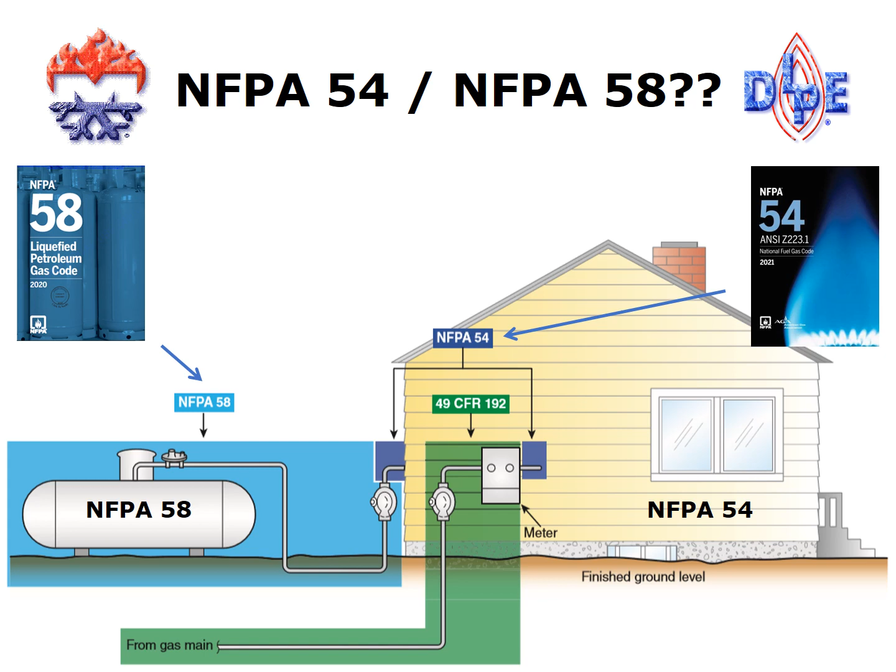Today we're going to talk about cathodic protection and how that system protects underground propane containers. We're going to discuss installation practices and also testing procedures.

The 2020 edition of NFPA 58 requires that a corrosion protection system be installed on all new installations of underground steel containers. This corrosion protection system should consist of a container with a coating that complies with section 5.2.1.11. Now, the containers that come from the manufacturer already have this coating in place.

In addition to that coating, all installations must have a cathodic protection system that consists of either a sacrificial anode system, which is the system we're going to be explaining and discussing today, or an impressed current anode, which traditionally is used for larger, more industrial type of accounts.

Also, in addition to the system being installed, a means of testing that system is required. We're going to go through not only the details of how to install a cathodic protection system, but also how to test it by the standards set forth in NFPA 58.

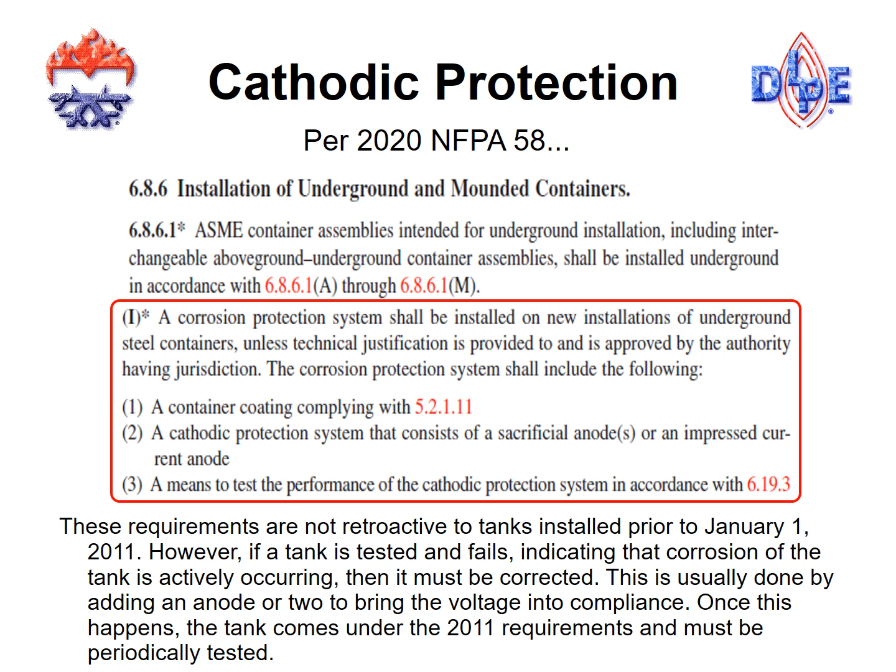Some of the terminology you may hear, and some of which we're going to talk about today, are as follows. We're going to talk about an anode, and in this case it's going to be an anode bag. An anode bag, or an anode, is an electrode where the oxidation or the corrosion will take place. In other words, the magnesium anode will sacrifice itself to protect the steel components of the tank.

We're also going to talk about a cathode. A cathode is basically a protected tank in a completed system. The way they describe it is an electrode at which the reduction is occurring. In other words, we're reducing the corrosion that's occurring at the container. This is the electrode at which protection occurs in the cathodic protection system.

In other words, a protected container or protected steel piping in an underground propane installation is what's considered to be a cathode. We're also going to talk a little bit about corrosion, which obviously, when we're talking about steel, comes in the form of rust, and that's exactly what we're trying to prevent.

We're going to mention electrolyte. What is an electrolyte? It's basically the common environment in which both the cathode and the anode share. So in this case, the tank or the protected tank, which is the cathode, in addition to the anode, which is the magnesium anode bag, are both sharing the environment of the soil. So in this case, the soil is the electrolyte.

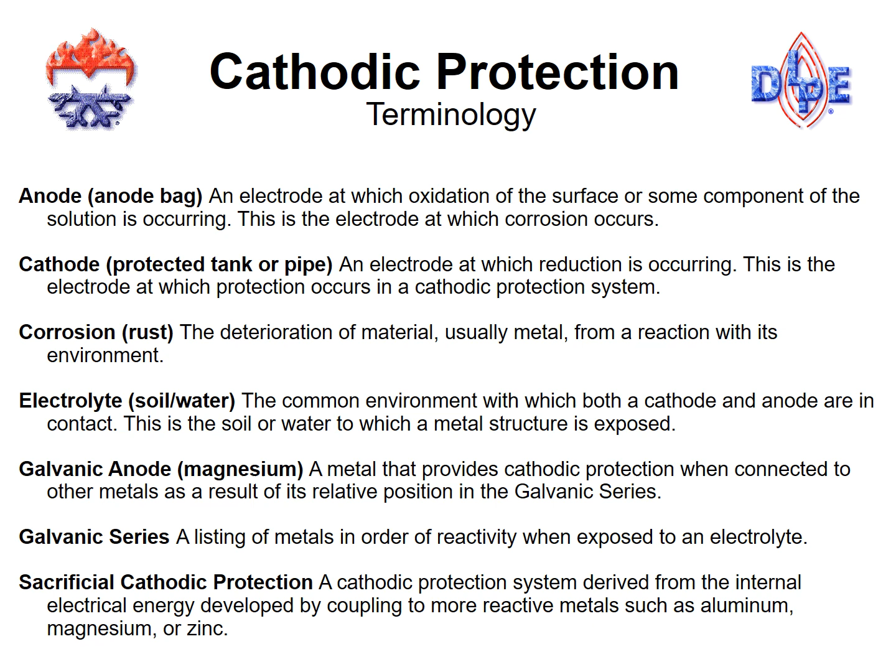Corrosion of a propane container obviously is a very aggressive form of rusting. Rust, when we're talking about underground propane tanks or underground steel piping, can be catastrophic. So that's what we're trying to prevent. We're trying to prevent that system from becoming so corroded or deteriorated to the point of failure. And that's what a cathodic protection system is all about.

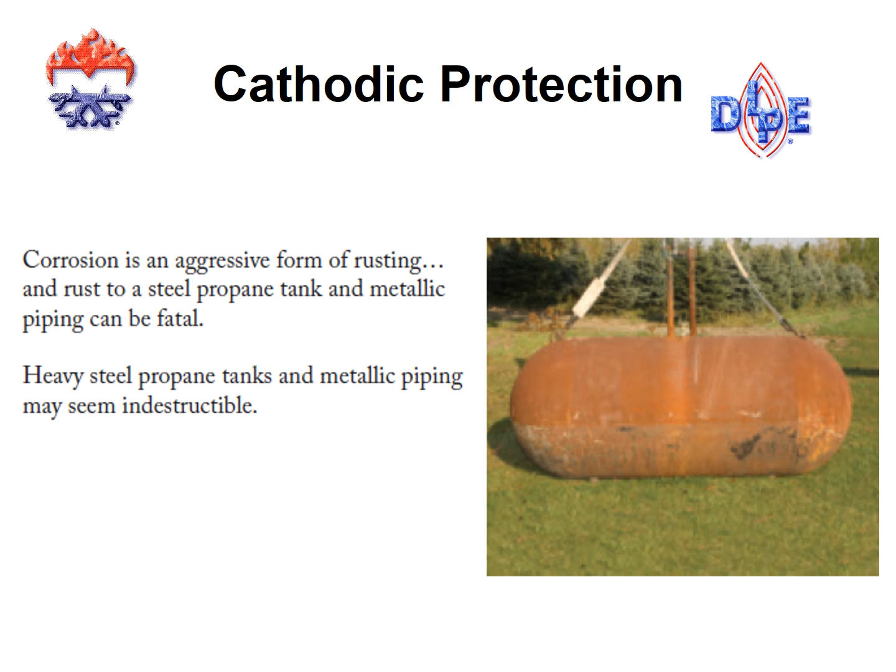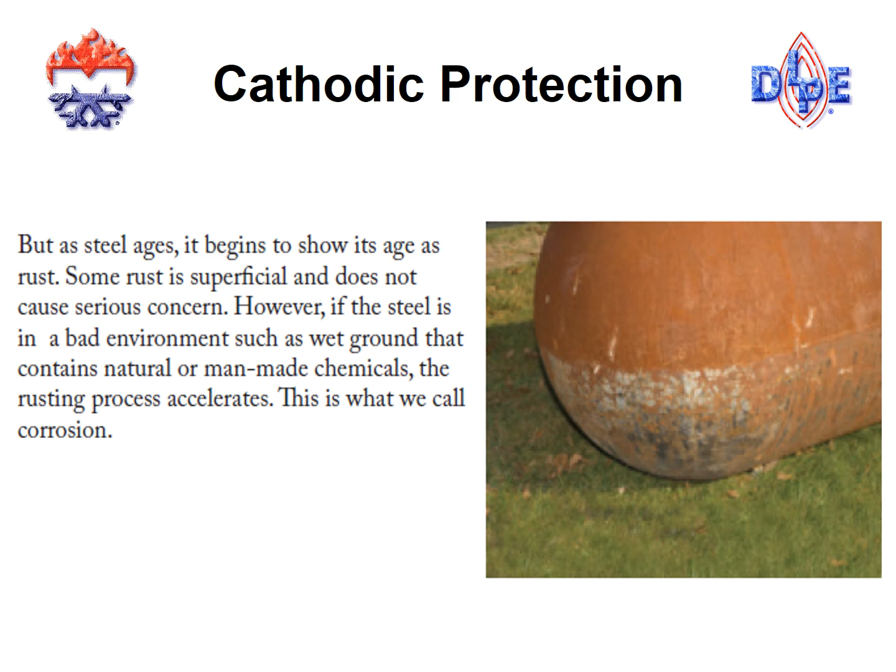Minor surface rust can be very common and may not be a big issue initially. But that mild surface rust, if not treated properly and maintained, can quickly become a more critical problem. Over time, that superficial or surface rust can become deeper, more pronounced corrosion, and it will ultimately form pits or pitting in the surface of the container. That's when the container will break down and potentially cause a more dangerous situation.

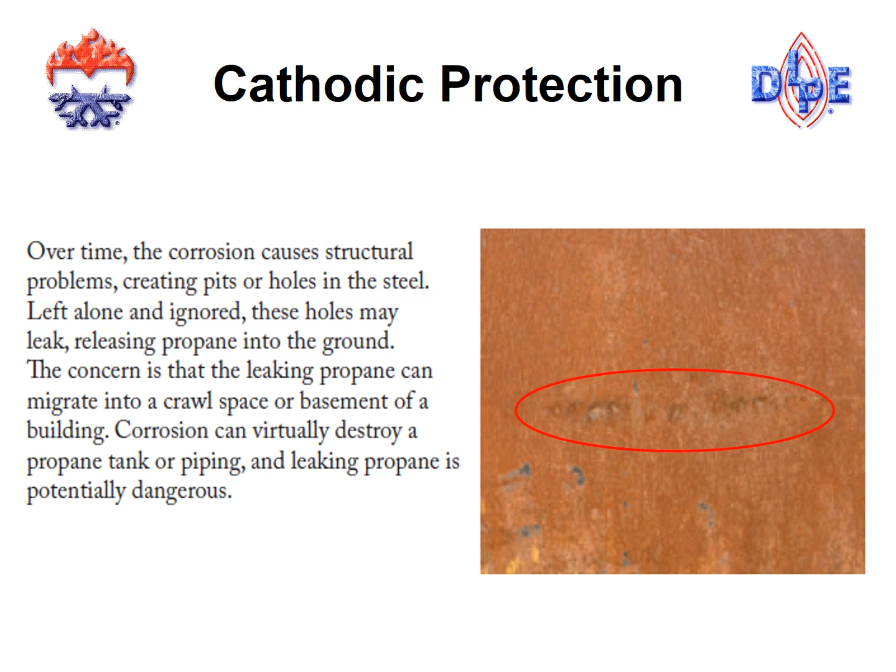When you consider cathodic protection, there are really two lines of defense. The first line of defense is the coating we talked about a few minutes ago. That coating is required to be installed on any underground container before it goes in the ground and before it's backfilled. That coating is provided by the tank manufacturer, so that's our first line of defense against corrosion of the underground tank.

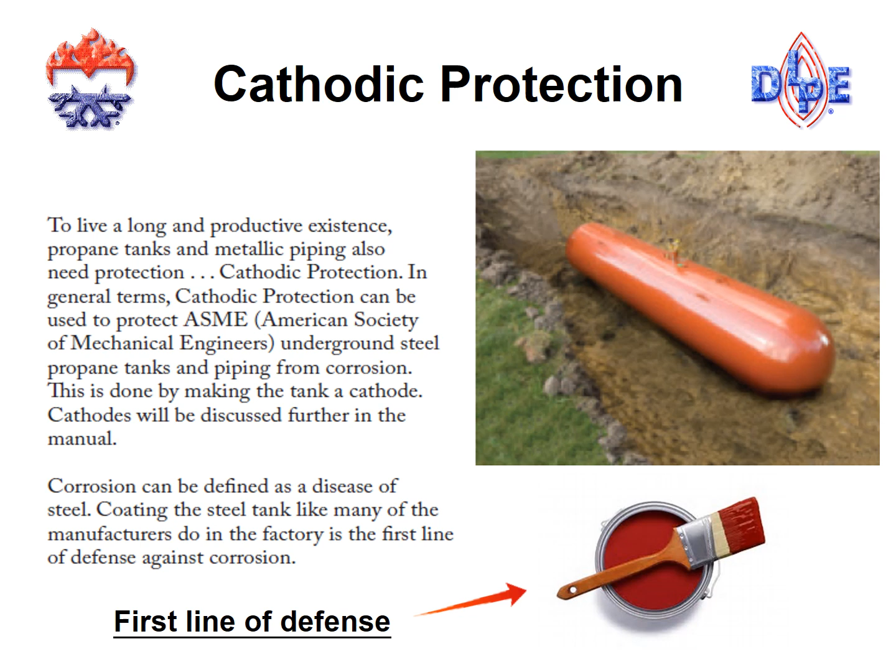The second line of defense is the magnesium anode bag. This is the anode that is connected, or should be connected, to every single underground tank installation. The anode bag acts as a sacrificial component to this entire system and will actually receive the corrosion instead of the steel container receiving it, if properly installed.

There are really two ways to cathodically protect underground propane tanks and piping. The most common by far is with magnesium anode bags. I mentioned earlier the option of using impressed current, but that's generally used in larger, more industrial types of installations. So what we're going to concentrate on in this seminar is instructing you on how to install and test magnesium anode bags.

There are many different types of anodes, but the most popular ones used in the propane industry are standard potential magnesium and high potential magnesium. Aluminum alloy and zinc can also be used, and we're going to discuss the differences now.

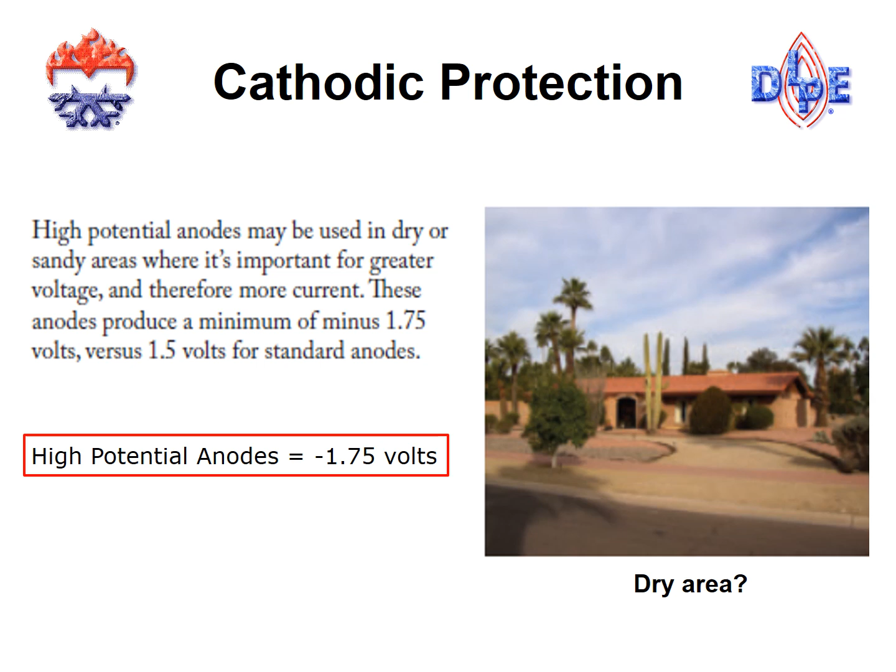You may also have locations near the coastline where an underground tank is installed next to a body of water that may contain brackish or salty water. In those cases, it's possible the local authority having jurisdiction would recommend a zinc anode bag.

However, in the propane industry, the standard minus 1.5 volt magnesium anodes are generally used. That anode will work in most any type of soil condition in the United States. There are a few exceptions, as I said earlier, where the high potential magnesium or zinc may work better, but for all practical purposes, the standard minus 1.5 volt magnesium anode is what is required in the propane industry.

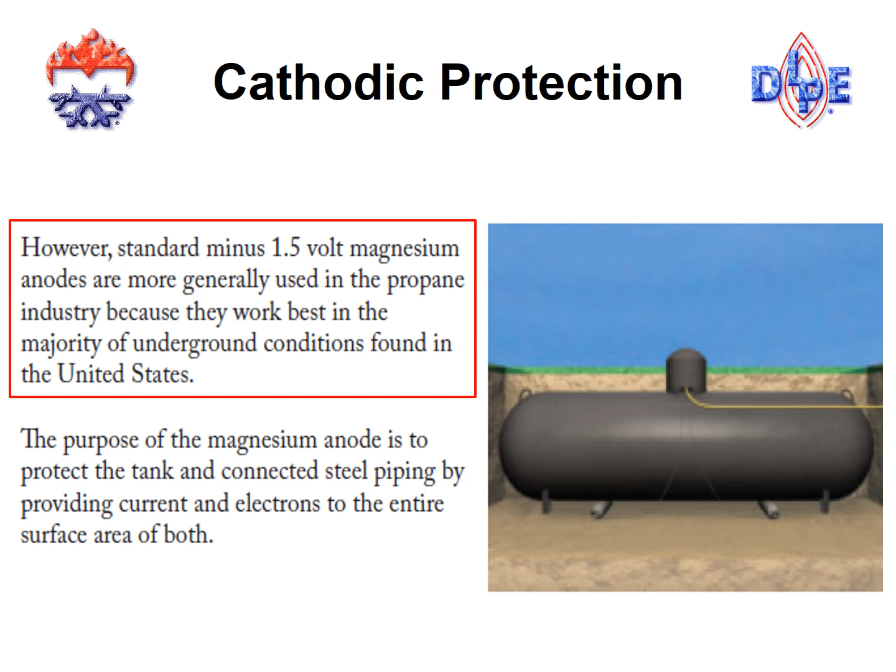The purpose for installing anode bags on underground propane containers is to protect the integrity of the tank or container. It prevents corrosion from happening to the tank. It does this by acting basically like a light bulb, lighting up the surface of the tank.

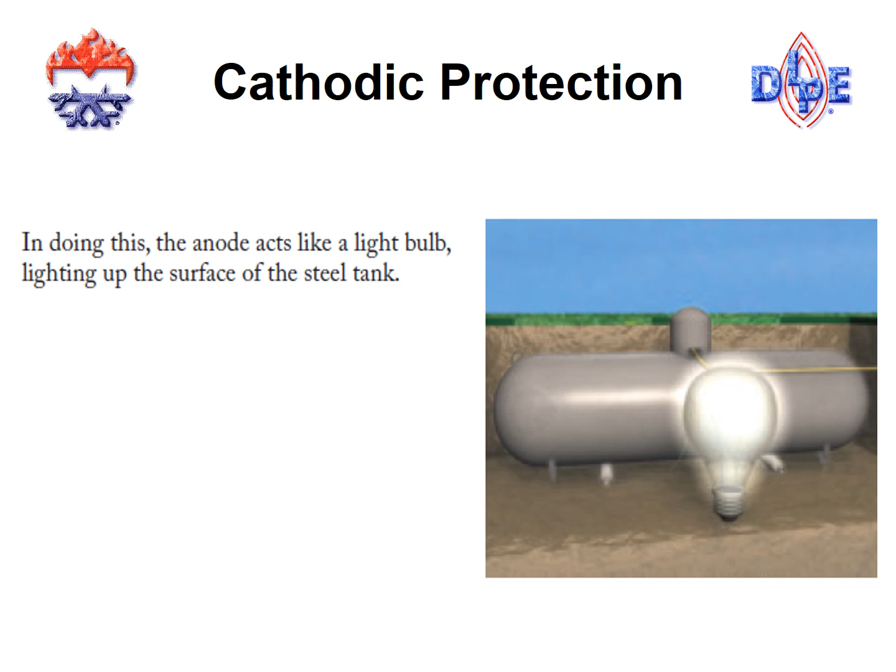This happens because all of the electrons flow from the external magnesium anode along a wire into the steel tank, which, as I referenced earlier, in a protected system is now referred to as the cathode. So it's basically an entire balanced system, which results in the magnesium anode bag, once connected to the underground container and backfilled, protecting that container.

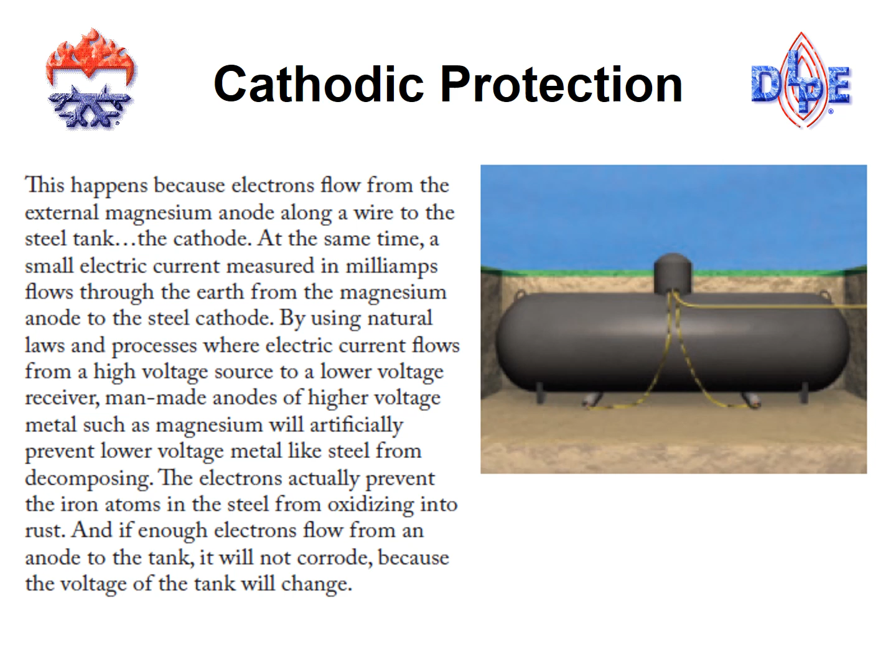I mentioned that the code requires not only the installation of cathodic protection, but also a way to test it. Testing it is really as simple as using a digital multimeter and a copper sulfate half cell, which I'll get into in a little while.

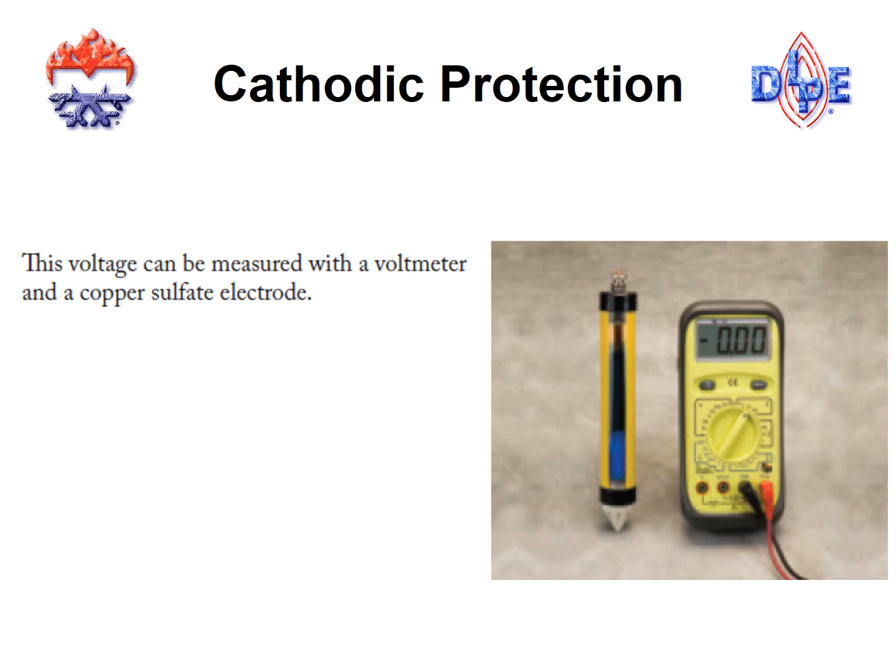You can see in the chart on the right that different metals have many different voltage readings. But we're really concerned about steel, and what they're classifying as mild steel, which is clean and shiny, has a voltage reading naturally around minus 0.5 volts.

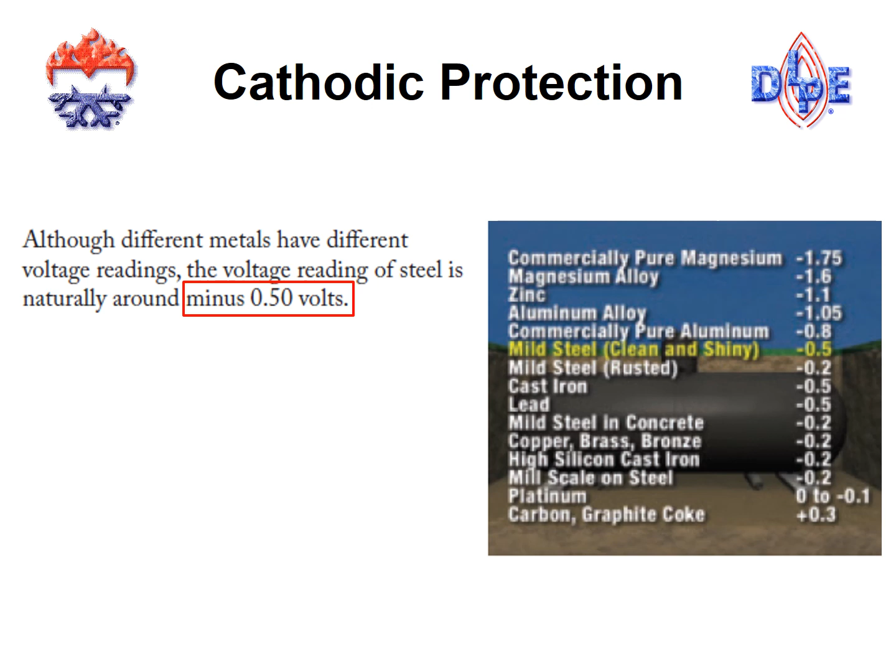A reading of minus 0.5 volts on your meter when doing a test is an indication that the tank is currently unprotected. Any reading below minus 0.85 is an indication to the person doing the test that there is work needed to be done on the cathodic protection system, and that currently the tank is not being protected properly.

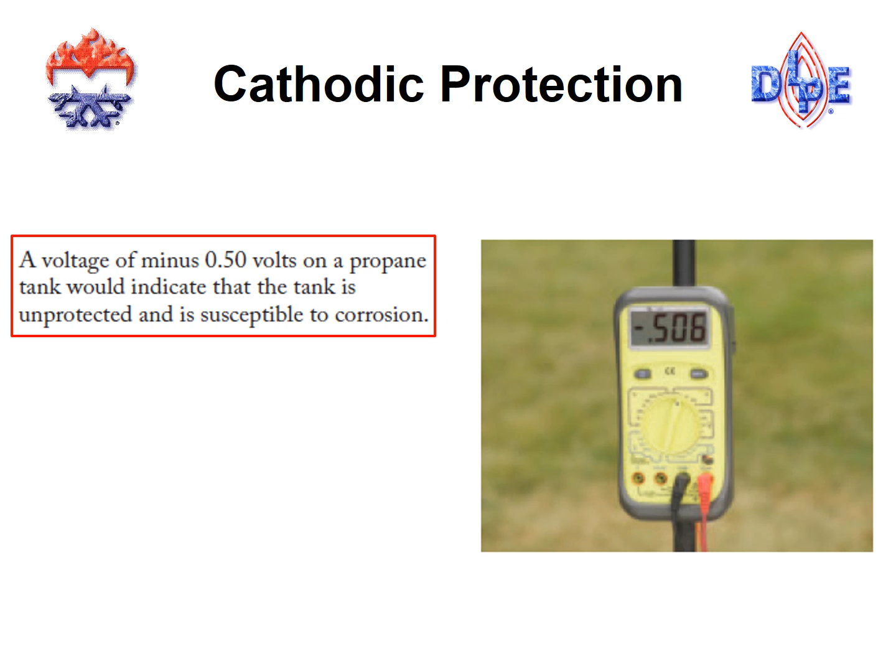To do this, we must get the electrons to shift. And we're looking for a reading that is going to fall somewhere between minus 0.85 volts and minus 2 volts. Somewhere in that range is what we're looking for.

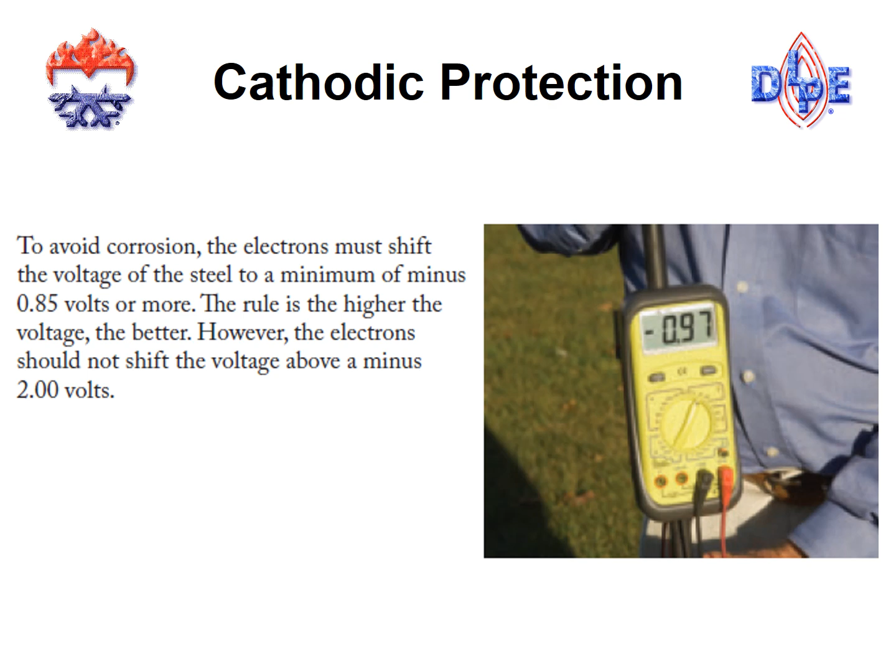Once we have that reading, that good reading on all four sides of the tank of minus 0.85 to minus 2.0 volts, we know now that we have a protected underground tank. And that is what we call a cathode, a protected piece of equipment, a protected piece of steel in the environment that's shared with the magnesium. So the tank now becomes a cathode.

It's fully protected. And the length of protection really depends on a few different things. Has the tank been prepped and installed properly? And also, what are the soil conditions like?

If the tank is installed in a dry, sandy type soil, it's possible it could last for years and years. However, if the tank is installed in a more corrosive type of environment, maybe more of a wet clay type soil, or in a more acidic type soil, whether it's at a landfill or possibly an agricultural type of installation, those things will really dictate the length of the effectiveness of the cathodic protection system that you put in.

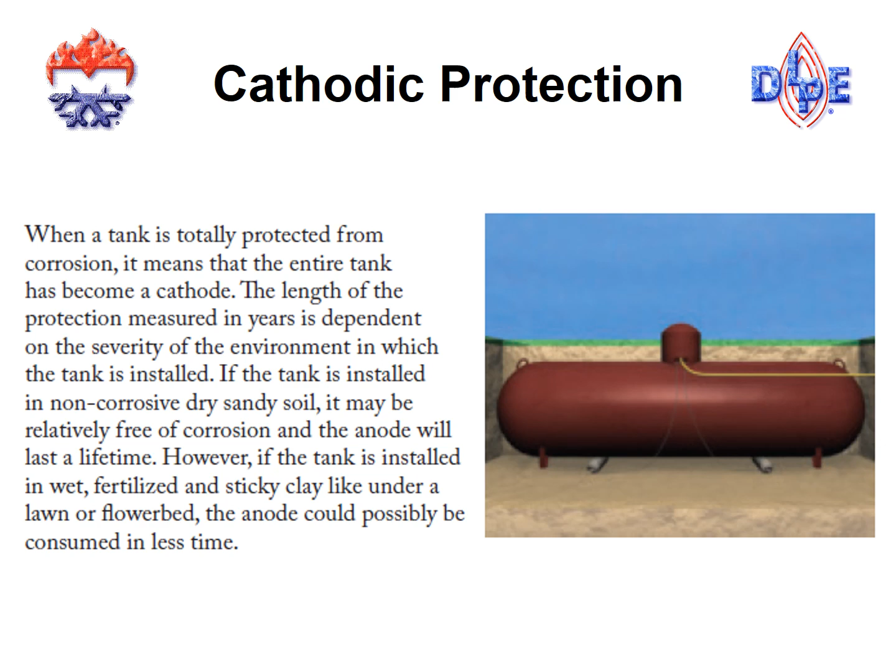We're going to discuss installation procedures of cathodic protection systems and also the testing procedures.

But first, it's a great reminder to point out that it is important before any digging is done, whether it's for the tank or the gas piping, to make a quick phone call to 811, which will notify utilities of work that will be done in the areas that they service so that they can come out and mark the ground to verify that when the tank or piping is dug, there are no utilities in the way. For example, water, cable, gas, or any other type of installation that may be there will be identified, and it will tell the installer that they have a safe location to begin the project.

It's also important to note that when we're preparing for the installation, generally a 500-gallon underground tank will receive a single 17-pound anode bag. If we're installing a 1,000-gallon underground tank, generally speaking, two 17-pound anode bags will be connected to that tank for proper installation protection.

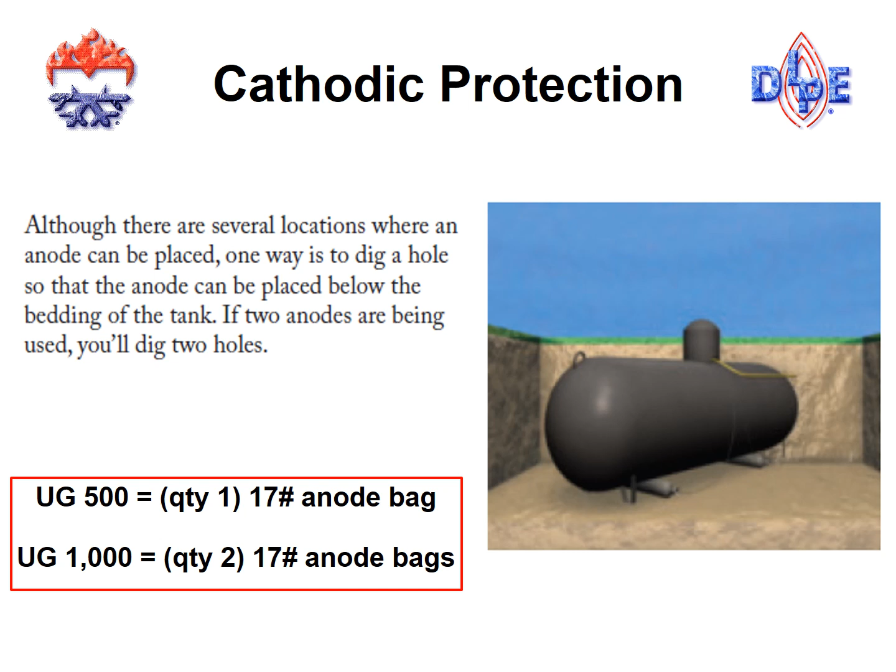For 1,000-gallon tanks receiving two anode bags, it's important to place them on opposite sides of the tank at opposite ends of the tank, and both being set out about 2 to 3 feet from the tank.

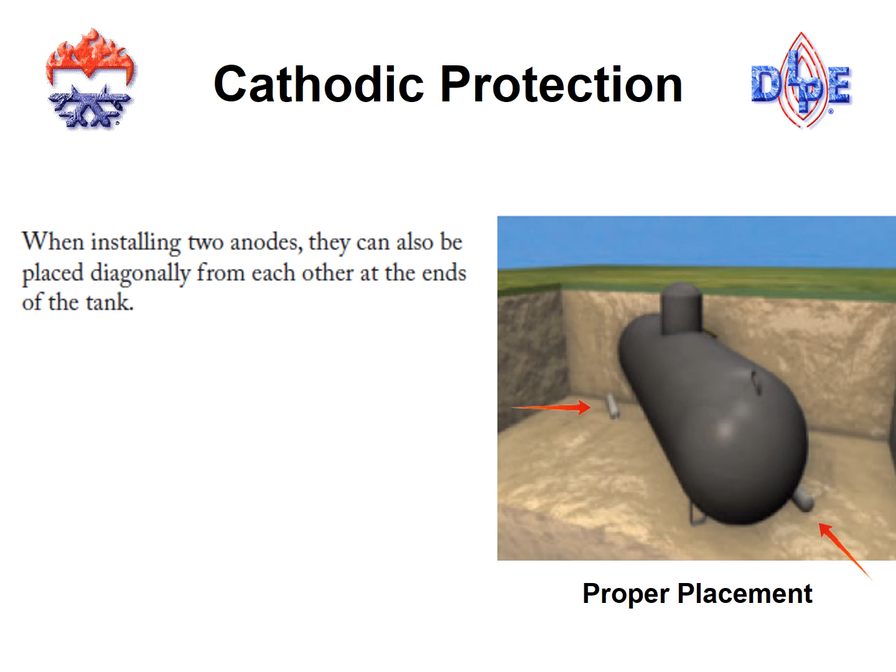One of the tech tips included in the Dealer's LP catalog is on cathodic protection. It includes a brief summary of installation instructions, including the number of anodes required for certain size tanks, in addition to where they would go with regard to placement next to the container they're connected to.

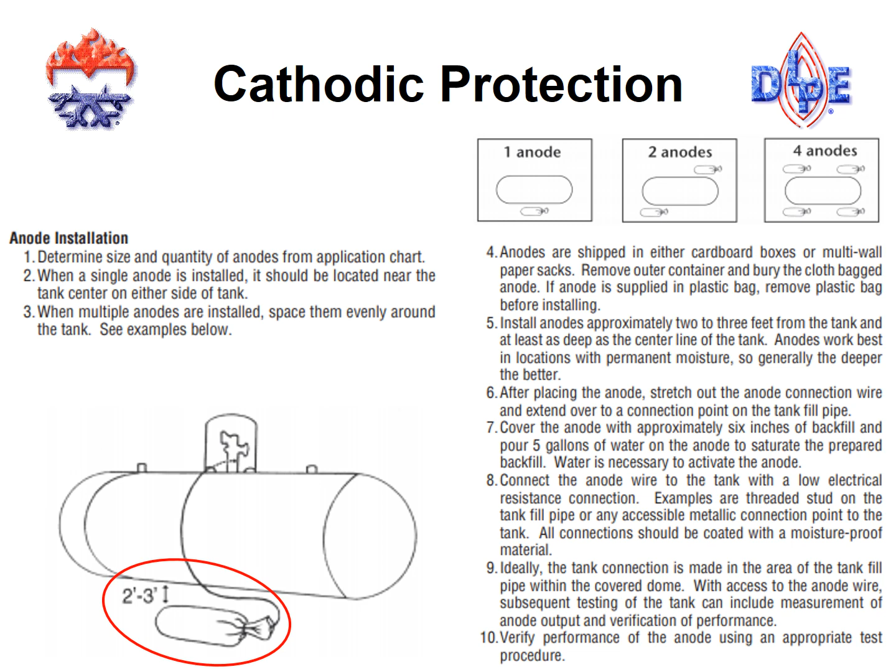Getting back to what I originally called the first line of defense, it's important that any nicks, chips, or scratches in the tank coating is touched up before that tank goes in the ground. Oftentimes during transit, whether it's from the manufacturer or to the job site, the coating on the container can become damaged. That is not something to overlook.

It is very important that any chip or scratch or any imperfection in the surface of the coating whatsoever be touched up with an approved coating, whether it's a touch-up can from the manufacturer or it's a different or alternative coating that's available more locally, perhaps at a hardware store.

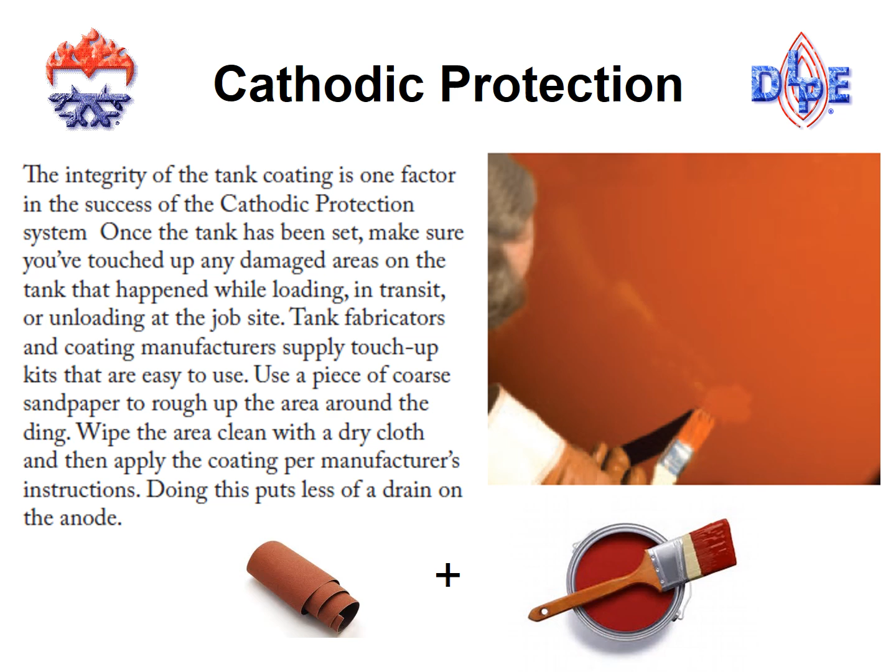This is a great example of what can happen if an underground tank is not prepared properly before it goes in the ground and gets backfilled. Again, this is where the importance of making sure those chips, nicks, and scratches get touched up.

This example took place not long ago, and basically what happened was this is an example of a tank that was installed with an imperfection in the coating. Maybe it was chipped or nicked during transport, but regardless, this hole, approximately 1/2 inch in diameter, was actually able to compromise this tank in a period of about 3 years. So in about 3 years' time, this tank went from being brand new installed in the ground to having a 1/2 inch diameter hole essentially burned through it from the corrosion.

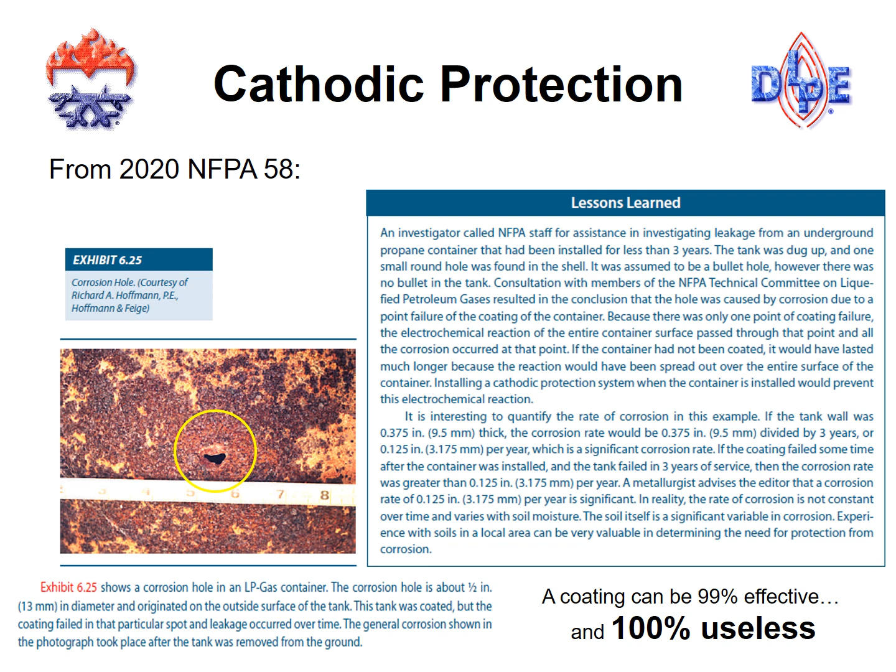Once we've made sure the tank is ready to go, there's no imperfections in the coating, and we get it installed in the hole in the ground, the next thing to do is get the anode or anodes out of their original package, take them out of the plastic bag or cardboard bag or both, and completely saturate the anodes. This activates them and prepares them to do the job we're asking them to do, which is protect the steel container. We soak them in a 5-gallon bucket by dipping them in, or saturate them with a garden hose to activate them and prepare them for installation.

The next step is to place the anode or anodes in the hole next to the container and unwind the wire that comes with the anode.

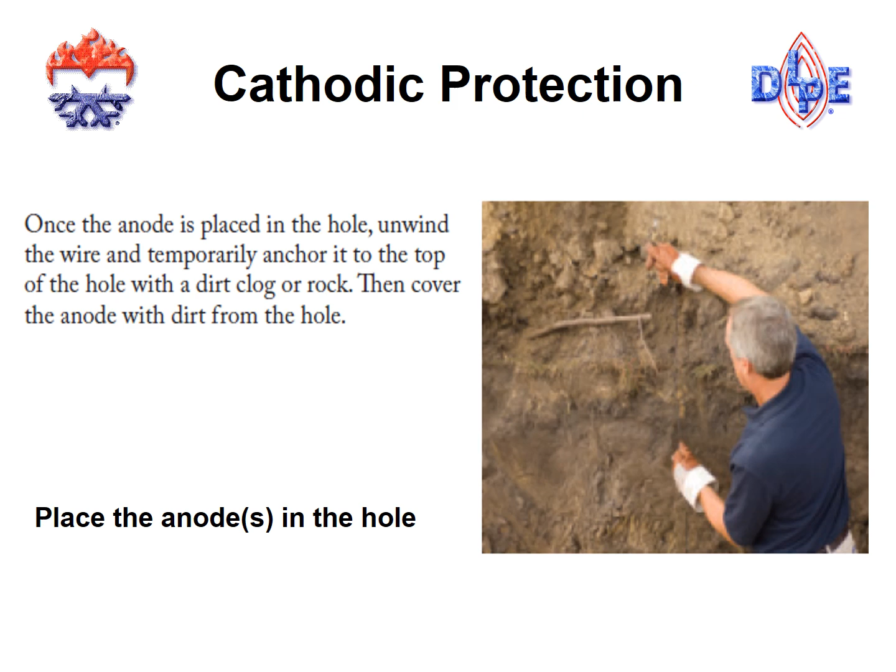The next step is to take the end of the wire connected to the anode and strip the insulation off. Then loosen the two lock nuts attached to the threaded stud, which is welded to the side of the riser on the underground tank. Once we loosen those two lock nuts, it should expose bare steel from the threaded stud. We take the copper wire, wrap it around that threaded stud, and then retighten the two lock nuts against the copper wire. Basically what we're doing is making sure we have good continuity between the end of the copper wire and the steel stud, which is again welded to the side of the riser.

Years ago, it was a requirement to actually Cadweld the copper wire onto the underground tank. Vast improvements have been made in the way to connect anodes to containers, and that is just one of them. There's no longer a welding requirement to attach a magnesium anode to an underground steel tank. So that's something to celebrate for sure.

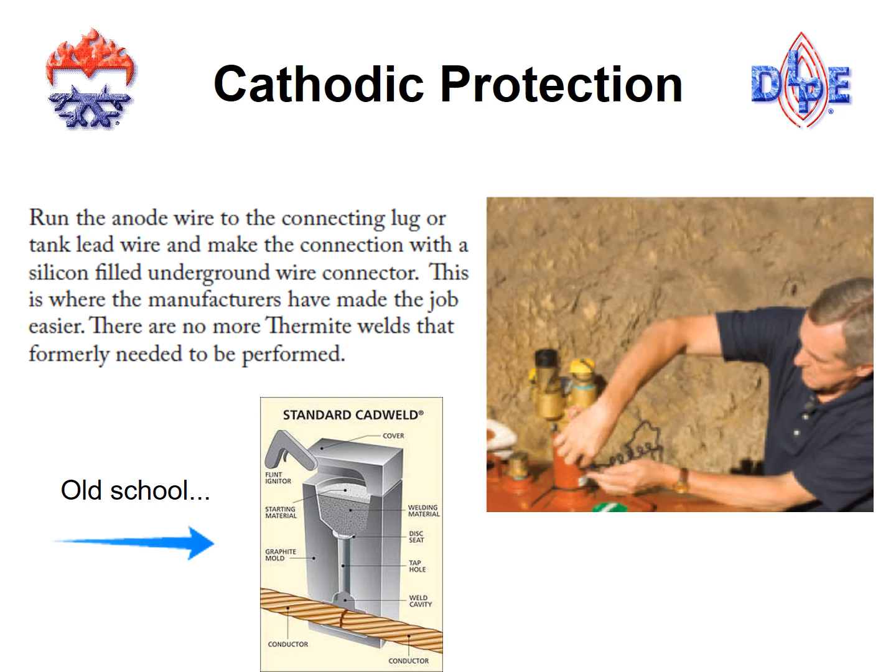I mentioned the importance of wetting and activating those anodes before they were installed, to make sure they're communicating with the soil and the tank properly and working correctly. In parts of the country with a very dry climate, it may be necessary to install extensions on top of the anode or anodes, through which water can be poured down onto them. In a dry climate, once the sand or soil is backfilled, it's very difficult for those anodes to receive water and stay wet.

In those cases, the authority having jurisdiction may require the installer to install a 2-inch PVC pipe on top of each anode in the installation. This requires periodic servicing, with the service company pouring water down those pipes and then placing a simple PVC cap over the pipe so the moisture doesn't evaporate back out. That may be one simple way to maintain water and moisture in the vicinity of the anodes after an installation is done. Again, this isn't something all communities require—it would be an option or possibly a requirement depending on the AHJ in parts of the country that are very, very dry.

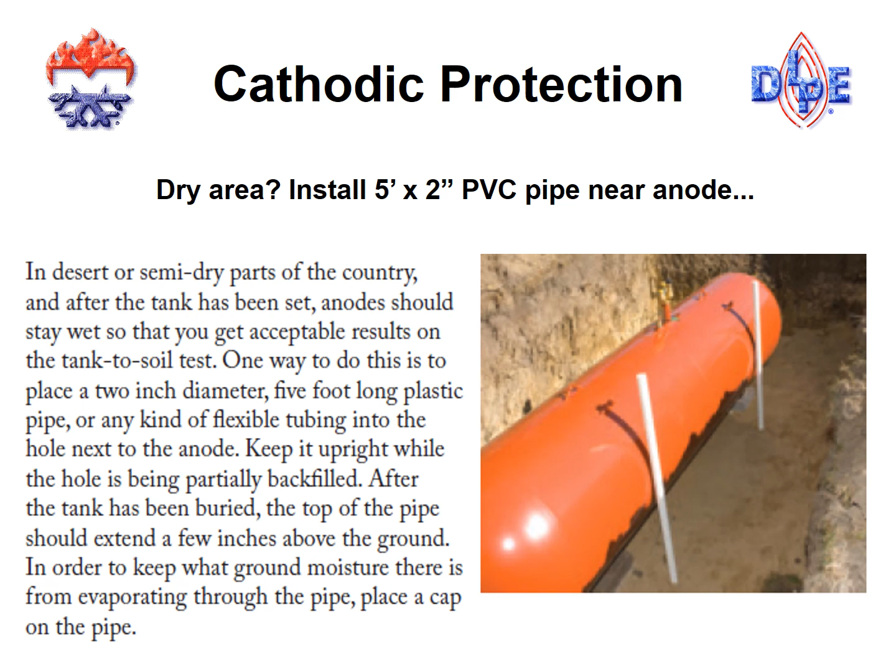On the flip side of the dry climate, we have the colder, snowy climates in the northern and northeastern parts of the country. In those areas, it's a requirement that underground tank installations be marked with a pole, flag, or something denoting where the tank is. For example, through traffic, landscapers, snowplow drivers—anyone driving past that tank, whether to park their car in their garage or do service work at the site—must be aware at all times of where that underground container is.

When anodes are sized for an installation, they're generally sized to protect the tank and the tank only. In installations where metallic tubing is used, for example if an underground tank is installed with a run of copper tubing from the first stage regulator over to the second stage regulator at the building, it's important to install either a dielectric pigtail at the service connection on the tank or a dielectric union at the outlet of the first stage regulator. What this will do is isolate the tank or container from the underground metallic tubing.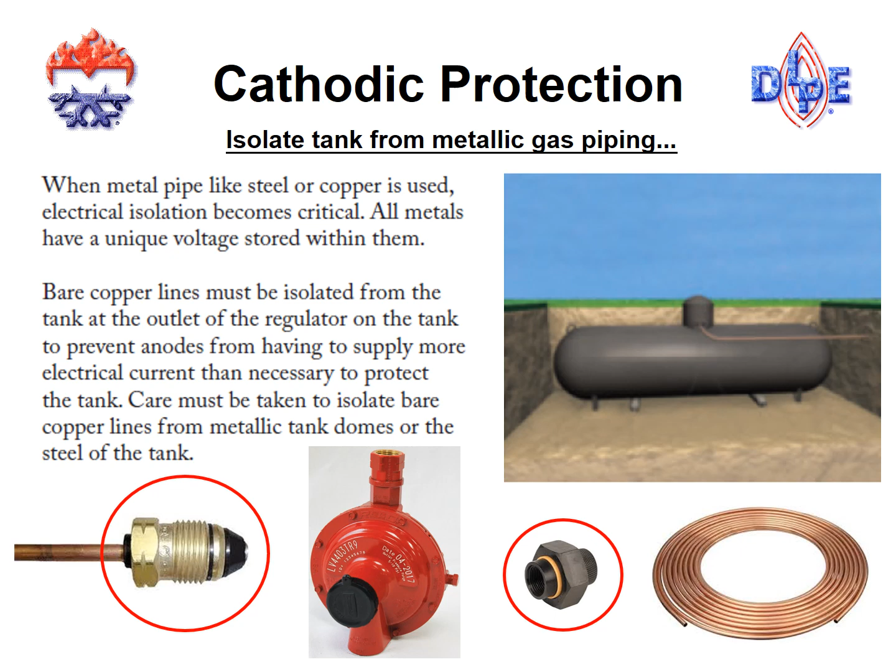It is required in NFPA 58 to cathodically protect not only the underground steel tanks, but also any underground black iron or steel piping installed underground. A lot of that is connected to the container, and there are ways that anodes can be sized to be installed at the container to protect not only the container, but the steel piping it's connected to. These are somewhat rare installations, but steel piping is used in the propane industry underground.

A lot of times it's used for agricultural applications or light commercial applications. We do have a calculator available that can determine, if a customer wants to size underground steel piping along with an underground steel propane tank, the anodes required for that job.

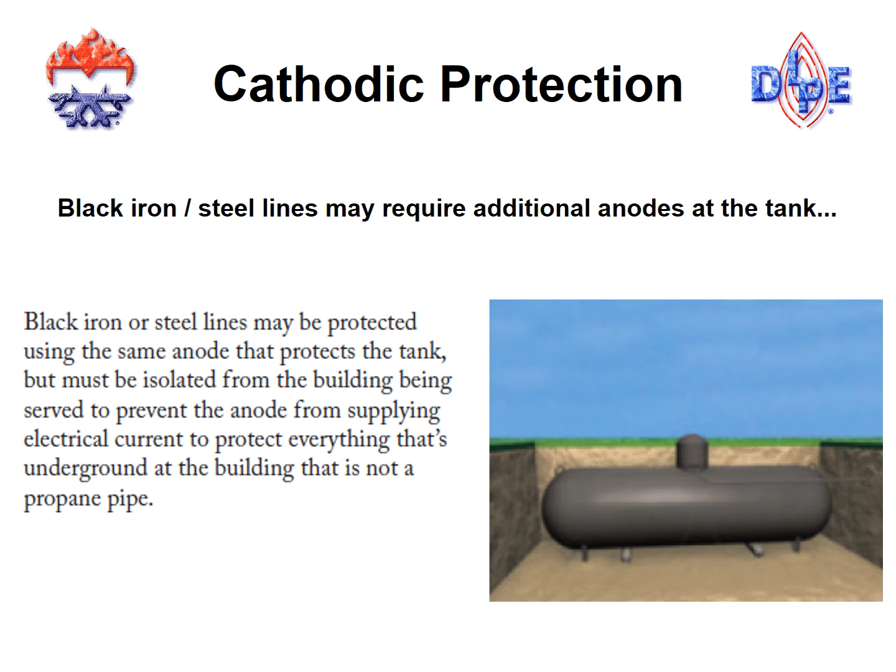NFPA 58 also states that it's required for a dielectric union to be installed above ground and prior to entering the building of a system where underground metallic tubing has been used. So as we discussed earlier about installing the dielectric isolation at the container to separate that from the underground metallic tubing, it's an actual requirement in the code to install a dielectric union, whether it's a shutoff, a regulator inlet, or a standard dielectric union, at the building, above ground, and prior to entering the building.

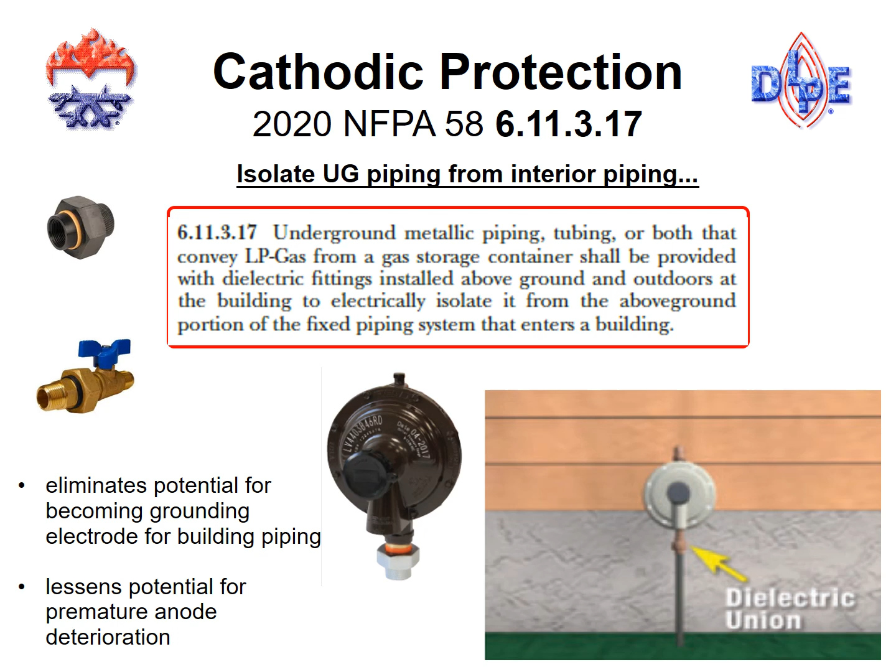We've spent some time talking about the installation procedure of cathodic protection as part of the code, but part of the code is also testing the system once it's installed. Really all we need to accommodate that is a digital multimeter and a copper sulfate half cell. Dealers LP sells a kit that has the meter, the half cell, all of the extended wiring, documentation booklets, and also a plastic case that houses the kit. It's a very handy tool to use when you're doing cathodic protection tests.

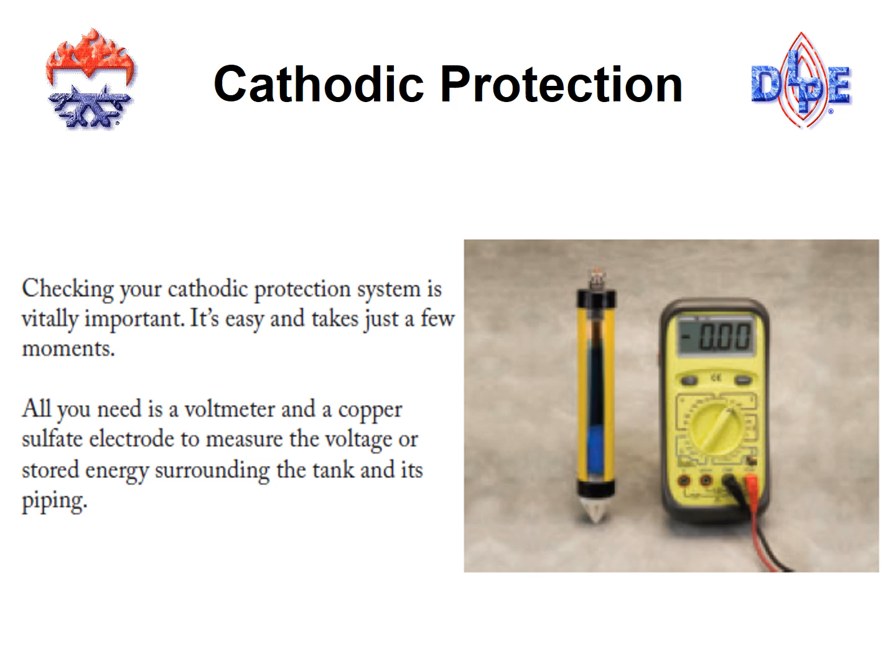When testing is performed, the first step is to moisten the ground at all 4 locations where the testing will take place. In other words, we want to wet the soil on all 4 sides of the container. We want to take the copper sulfate half cell and basically touch the earth or the electrolyte where the container sides are, directly below the surface of the soil or the sod.

Once we've moistened the soil or the sod on all 4 sides of the container, we want to take our digital multimeter and set it to the 2 volt or 20 volt DC scale.

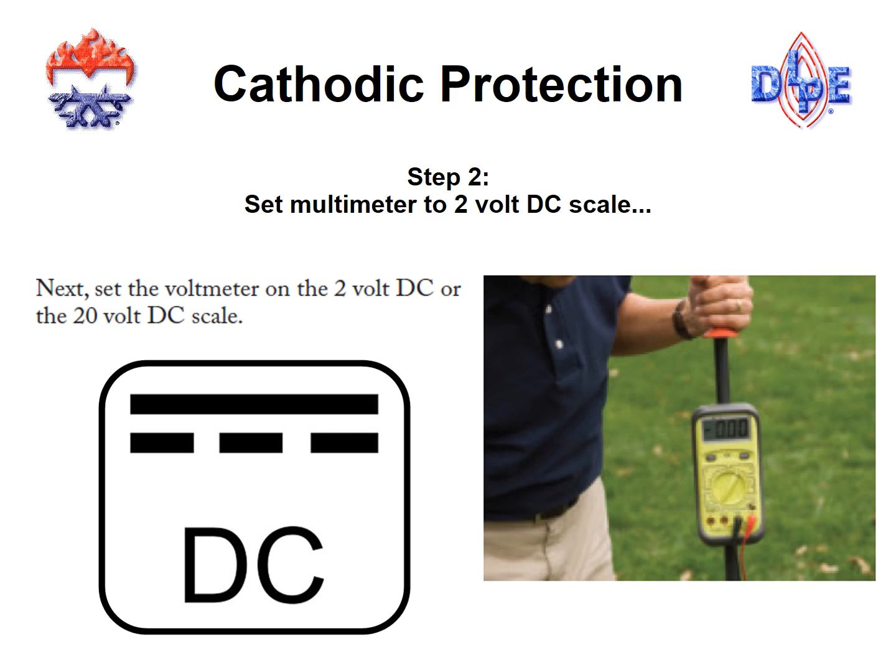The next step is to take the positive lead that's connected to the multimeter and connect it to the brass multivalve. What I would generally recommend is to remove one of the Acme caps and place the alligator clip on one of the Acme threads to make sure it holds. The negative lead would then get connected to the copper sulfate half cell or the copper electrode.

The next step would be to test the soil in the damp area, the wet area, above each side of the tank. We want to check all 4 sides. What we're looking for is a reading of between minus 0.85 and minus 2 volts DC.

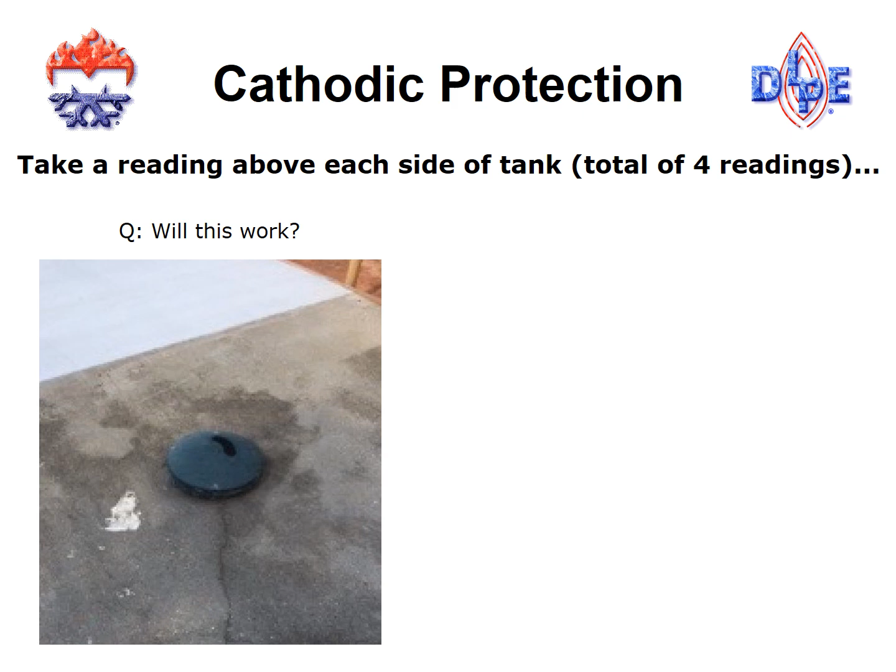For testing purposes, the answer is no, it will not work. The copper sulfate electrode must test the same electrolyte or the same environment that the tank and the anode both share.

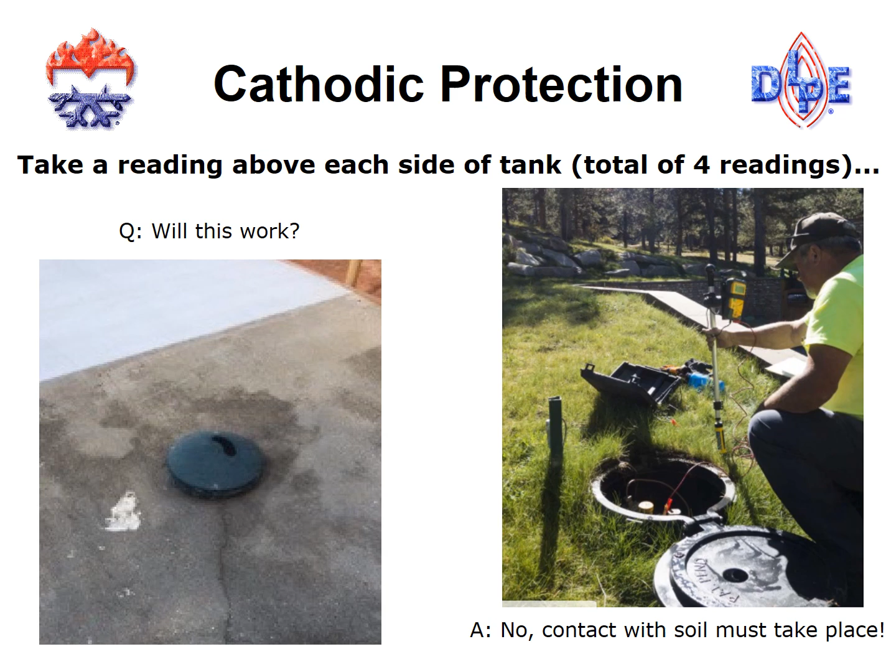If we take the unprotected tank voltage value at minus 0.50 volts, and we then connect the magnesium anode with a voltage of minus 1.5, what we're looking to do is average that number out somewhere in between. Ideally, we're looking for a number between minus 0.85 volts DC and minus 2 volts DC.

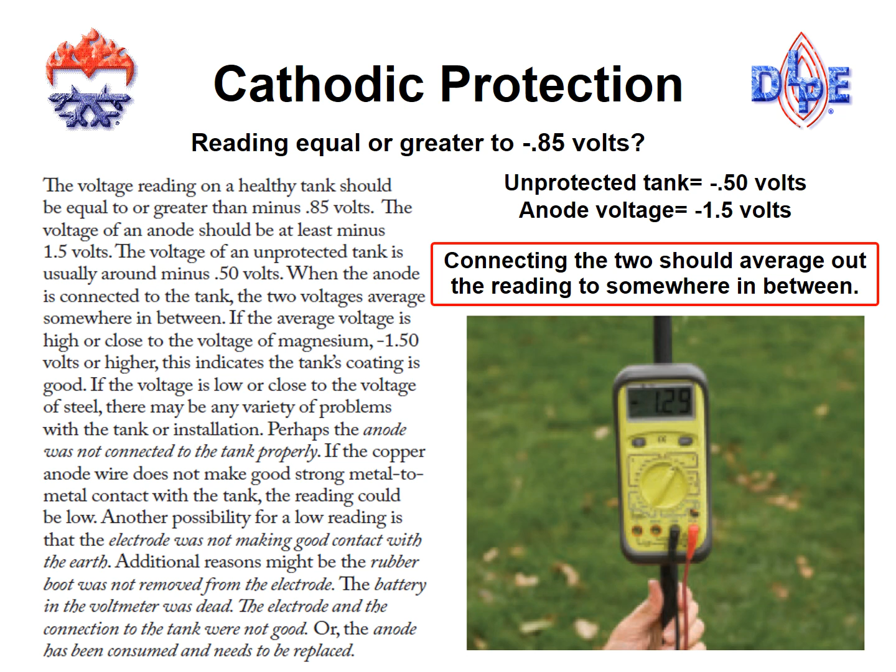If the numbers you're getting when doing the cathodic testing are not sufficient, if they're below minus 0.85 volts DC, there's a number of things you can do to troubleshoot the situation.

Is the voltmeter turned on? Is the battery good? Sometimes these meters will sit on the shelf for 6 months or so in between tests, and batteries do go bad. Have you taken the rubber protective boot off the copper sulfate electrode? The end of the copper sulfate electrode is required to be placed directly into the soil, so it has to communicate with the soil. Are the leads connected properly to both the electrode and the multivalve? Are you connected securely to both?

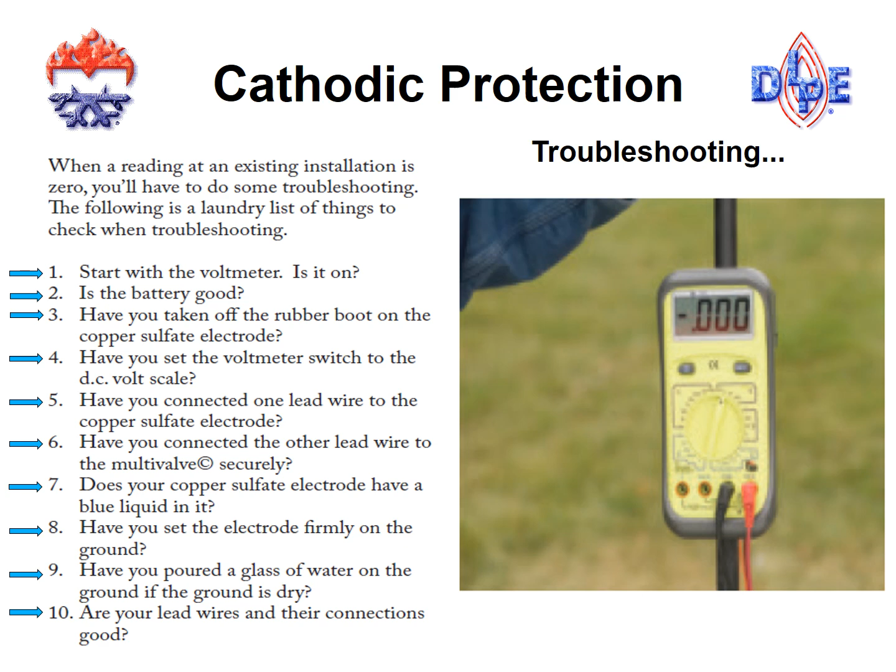Does the copper sulfate electrode have a blue liquid in it? Copper sulfate electrodes come with copper sulfate crystals, which have to be liquefied in order for the electrode to work properly. Have you set the electrode firmly on the ground? Have you poured a glass of water or a certain amount of water in the test areas on each side of the tank, or is the ground dry? If the ground is dry, you're not going to get a good reading. And of course, are all of your leads connected properly, whether it's to the meter, the copper sulfate electrode, or the multivalve? Make sure everything has a good, tight connection.

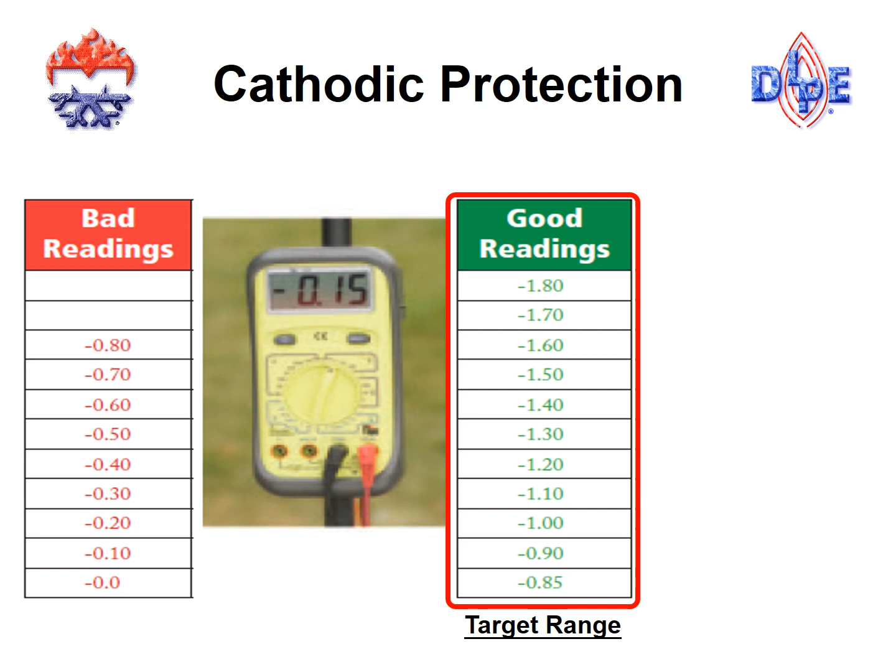Any reading below minus 0.85 volts DC will indicate a bad reading, as shown in the column on the left. A good reading would fall between minus 0.85 all the way up to minus 1.80 volts DC on your digital multimeter, as indicated in the green column on the right. Any reading that falls within this green column would indicate a fully protected system.

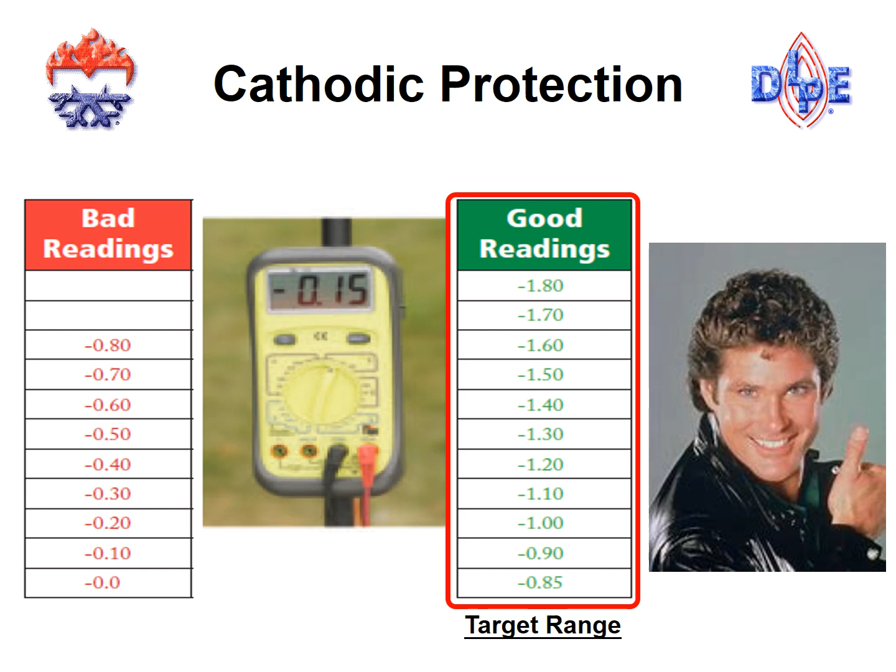There are times, however, when everything is done properly, everything's connected properly, and for some reason you still can't get the minus 0.85 volt reading and above. Well, we have a list of things to check if that occurs as well.

Some additional things to look for would be, is there copper tubing used in this installation? Is there copper tubing connected through the dome to the first stage regulator? Is there a dielectric union or insulating union between the copper tubing and the tank? Or, quite honestly, it could also be, is there a dielectric pigtail installed?

Oftentimes, if you have a tank installed with a properly sized anode system, those anodes are sized only for the container. If you put the added burden of metallic tubing onto that system and you don't dielectrically isolate it between the container and the metallic tubing, you most likely will get low readings on your digital multimeter. That could be what's throwing your numbers off as well. If you install a dielectric union in that position, you may immediately begin to see better numbers.

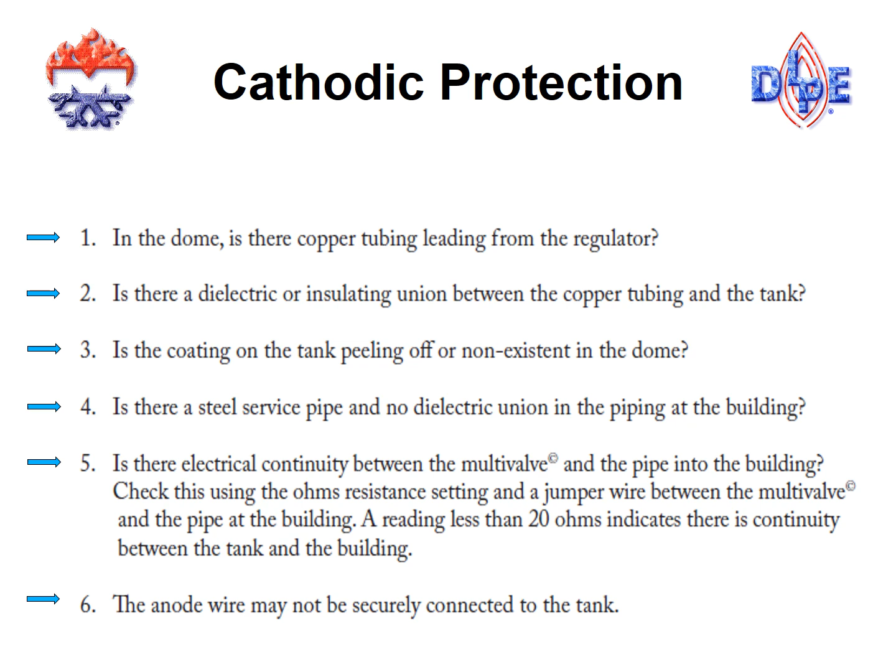Another reason your readings may be low is because when the anode was installed, it was left inside the plastic bag. Something to consider. The anode may be dry. Maybe it wasn't activated properly with water when it was first installed, or maybe it's in a dry climate and requires continual water to be introduced in the environment of the anode. It's also possible that it's an older installation and the anode has been consumed.

In that case, an anode would have to be added to the system. It's possible also that when the installation was done, the installer chose an anode that was too small. Maybe a 9-pound anode bag was installed on an underground 1,000-gallon tank. Even if the anode is in good condition, it still will not allow an appropriate reading on an underground 1,000-gallon tank with a single 9-pound bag installed.

It's possible that the anode is lying up against the opposite side of the tank. This is a common problem as well. Many times after a tank is installed, the landscaper or homeowner will install shrubs, flowers, or some sort of landscaping in the vicinity of the underground tank. Many people want to try to shield that lid or dome, and when they do that, oftentimes they put a plastic liner or weed block between the soil and the mulch or pine straw. If that plastic liner is in place and the copper sulfate electrode does not make direct contact with the soil the tank is in, you will not get an accurate reading. So make sure there's no plastic liner or weed block between the soil and the copper sulfate electrode.

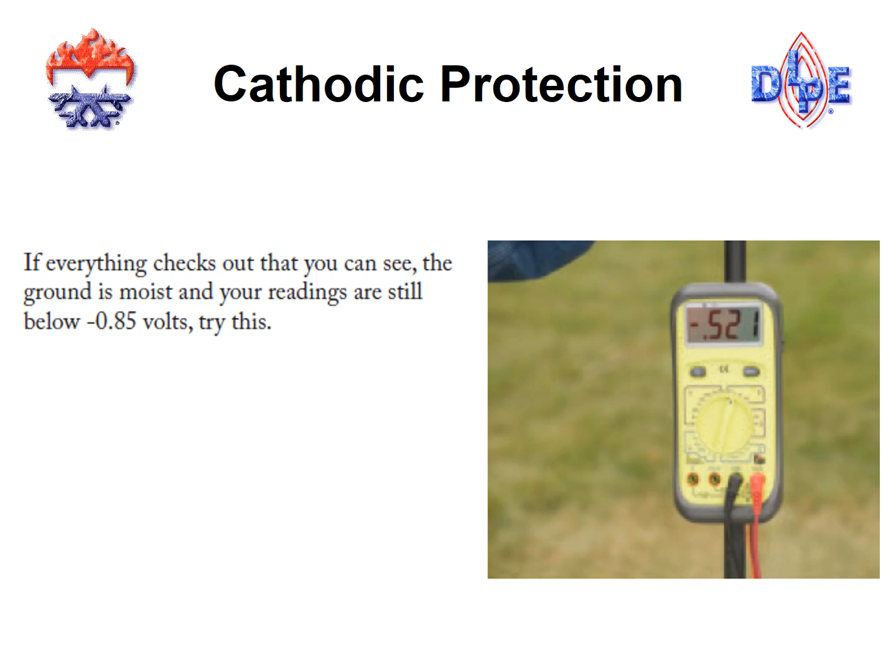If you've gone through all your troubleshooting and you're still getting bad readings below minus 0.85 volts, there are still things you can do to check the system. The first step is to grab a new anode that's the correct size for the installation you're working on, completely wet and activate that anode on top of the ground next to the underground tank installation.

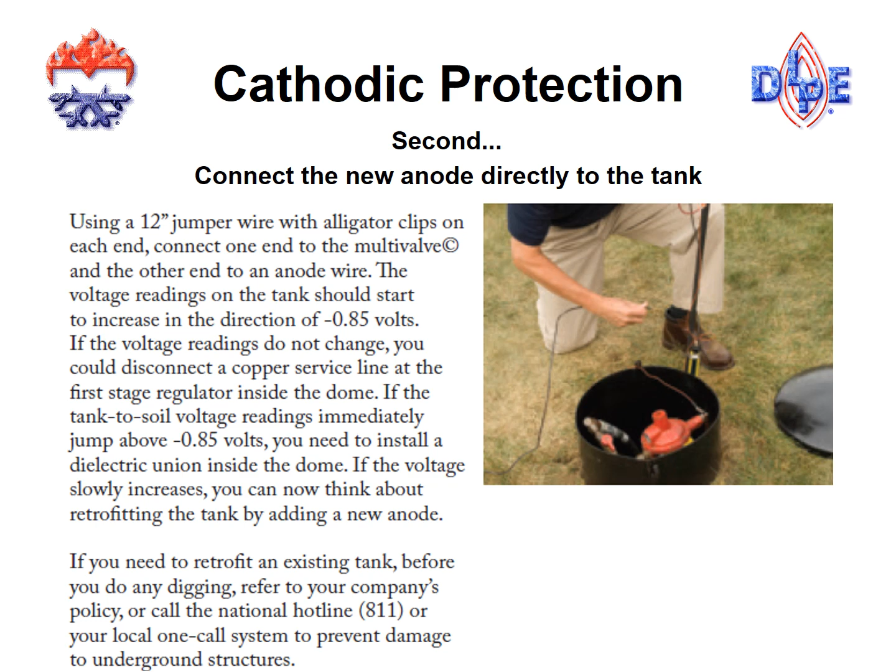Next, you want to take the wire from the anode and connect it directly to the tank. The third thing you want to do before any digging is done is to make sure there are no utilities in the area. Make sure the ground is clear of utilities before the next steps are taken.

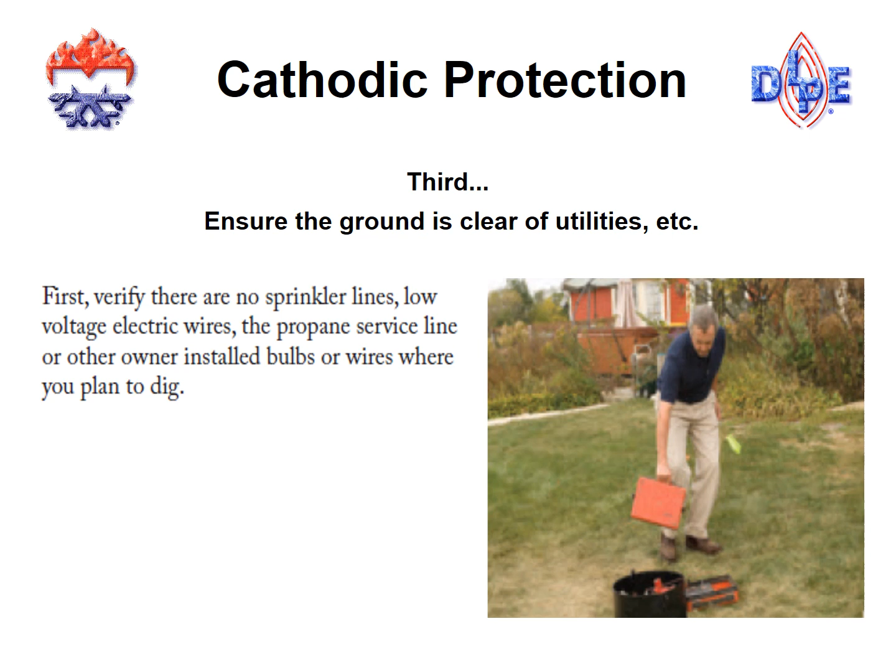Next would be to dig a vertical hole at least 3 feet deep. If this isn't possible, you may have to lay the anode down horizontally. Sometimes in dry environments, it's beneficial if you can go down approximately 18 inches and lay the anode horizontally in the trench, especially if there are water sources available, for example sprinklers in the area, that you could use to moisten the soil periodically.

If that's not the case, it's recommended to install a piece of 2-inch PVC directly over top of the anode so that periodically water can be introduced to keep it activated and to keep the soil around the anode communicating well with the anode bag. That's really more important in drier climates, and the pipe can be capped off so that after water has been introduced inside it doesn't simply evaporate back out.

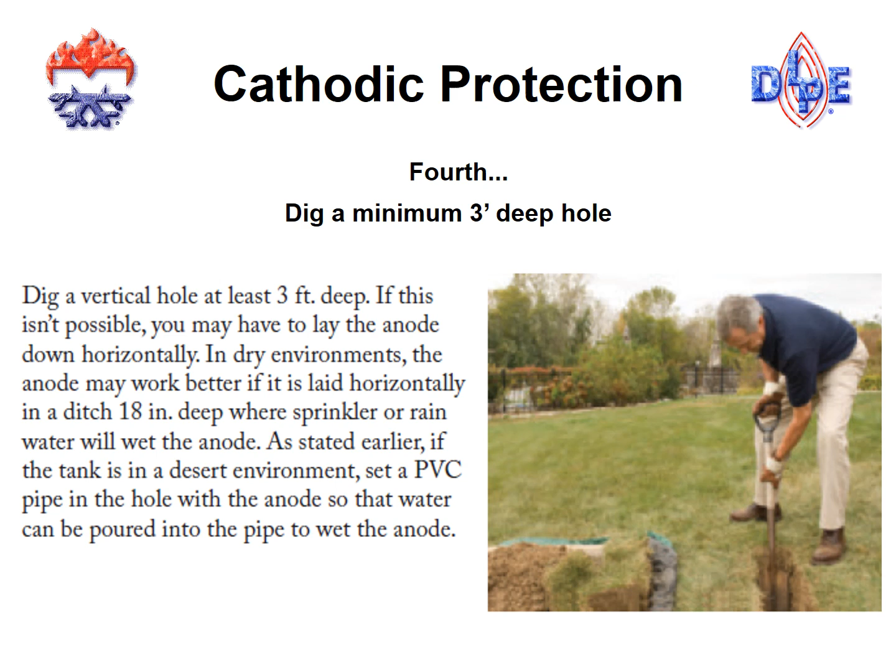Once the anode bag is in the hole you just dug, it's important to pour more water on the anode bag. In other words, you've already activated it, but you want to introduce more water to the anode after it's in the new hole, and also moisten the soil around the anode bag at the same time.

Next, you would want to take the tip of a shovel and vertically cut the sod between the hole you just dug for the anode all the way over to the tank dome. This will allow you to take the wire from the anode and press it down into the slot you've just cut into the sod.

The next step would be to take a cordless drill and drill a hole through the side of the dome in an area where there is no risk of hitting anything inside the dome cover or the shroud. We don't want to hit the riser, a regulator, a gas pipe, anything like that. We want to make sure we have a clear path through the dome into the dome cavity.

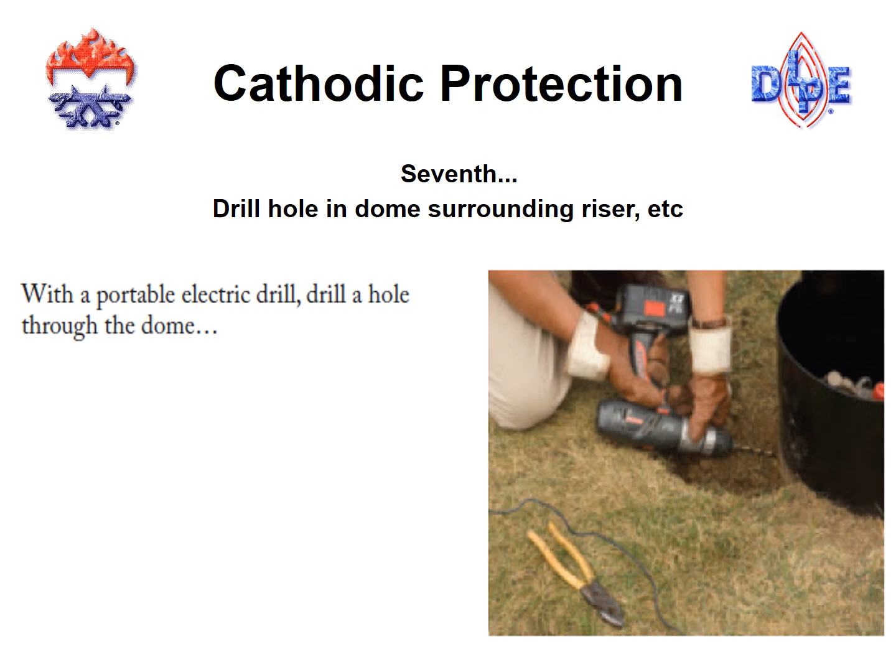Once the hole's drilled, we want to take a rubber grommet, install it in the hole of the shroud, and then pass the wire from the anode bag through the grommet into the dome of the underground tank.

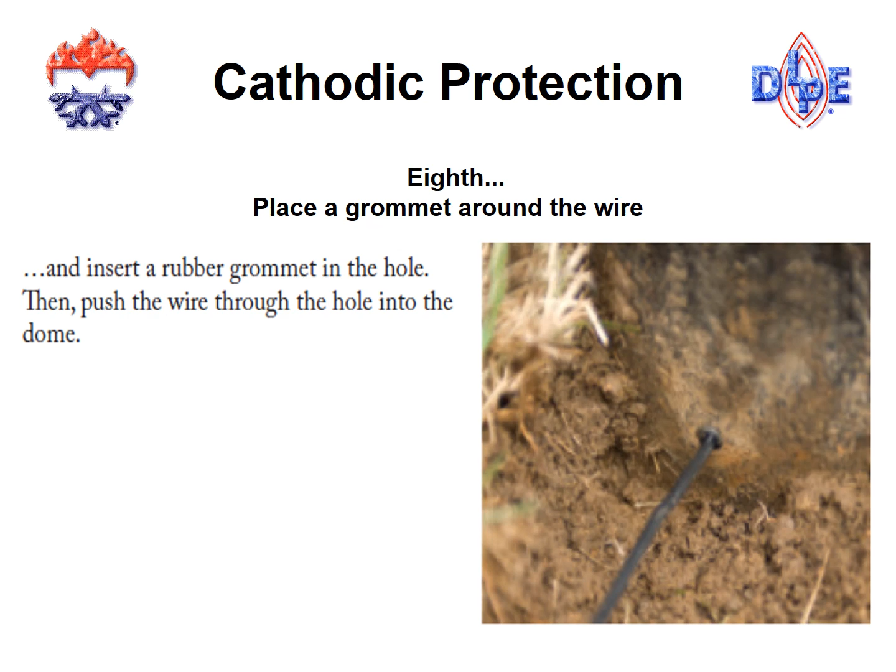The next step is to connect the wire from the anode bag permanently to the threaded stud on the riser, or the anode clamp if you're using an anode clamp.

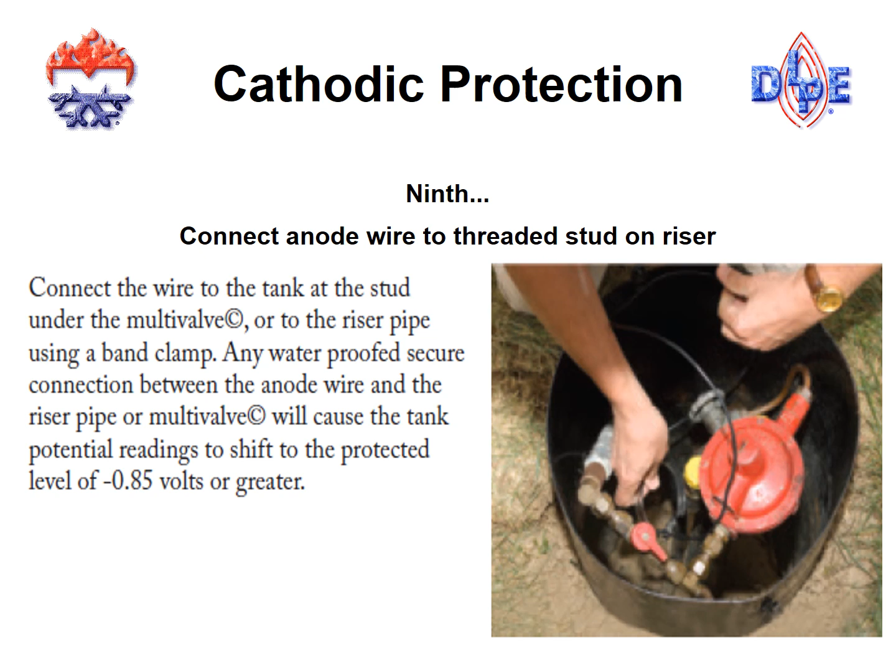Next, we want to backfill the hole where we just placed the replacement anode. Simply backfill the soil into the hole and make sure there are no voids or air pockets between the surface of the ground and the anode bag. Any voids, openings, or inconsistencies will give the meter an inaccurate reading. After backfilling and ensuring there are no voids, I would water that hole down with a garden hose or a 5-gallon bucket. That helps the soil settle around the anode to ensure good continuity and communication between the anode bag and the surface where the copper sulfate half cell will touch.

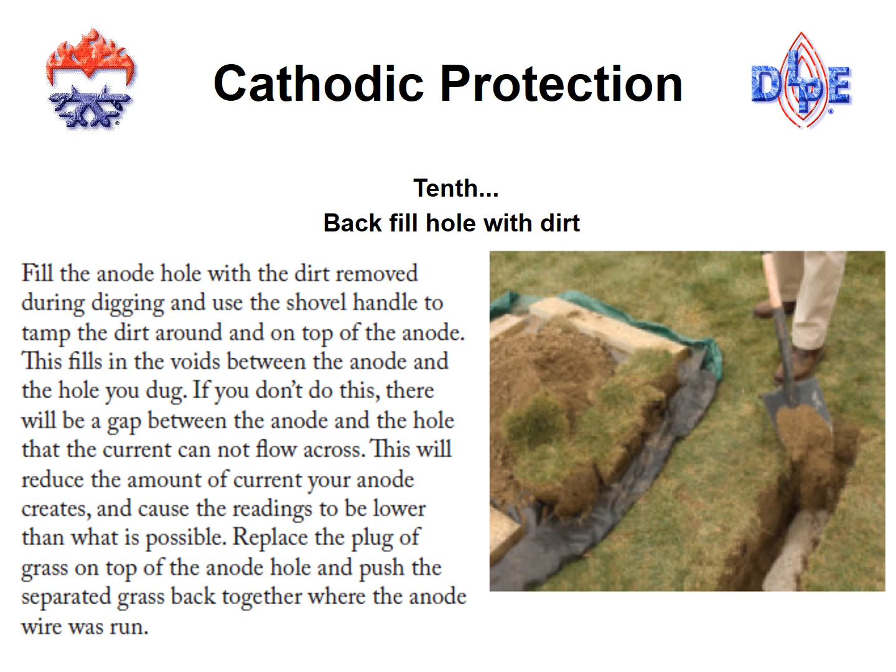Last but not least, recheck all of your readings, one on each side of the container. If you must, don't forget to moisten the soil in the test areas.

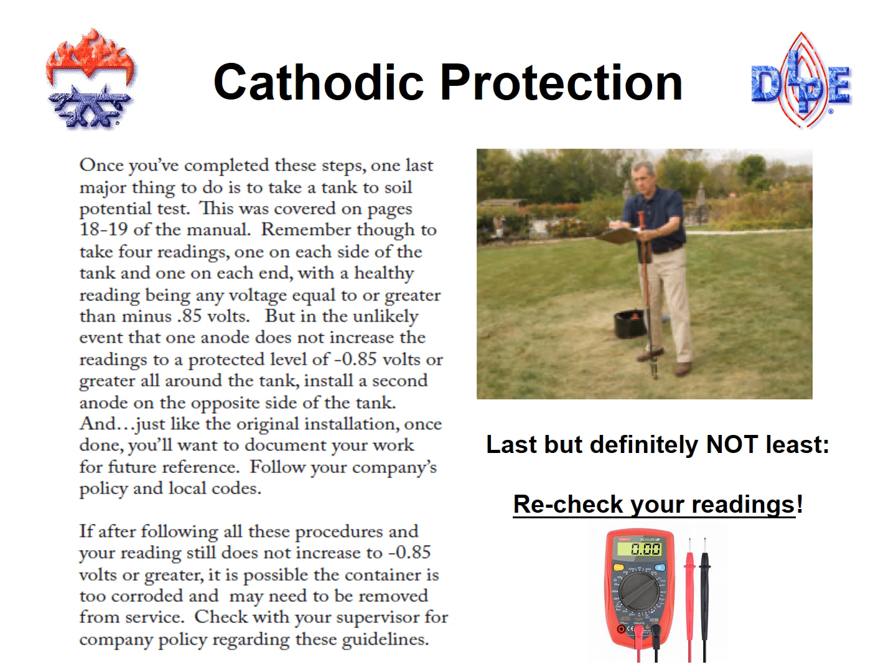With regard to underground piping, it's important to know that underground steel piping is required to not only be coated or wrapped, but also cathodically protected. It's recommended that copper tubing be coated as well, however it is not required. Again, it's important to always check with your local authority having jurisdiction to verify these code requirements and/or exceptions.

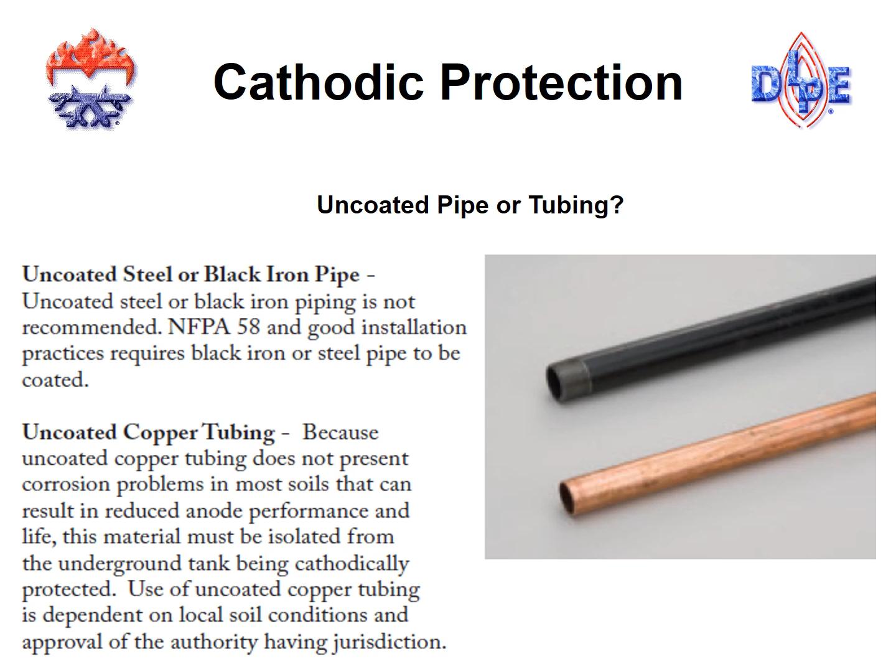Regarding the installation of underground steel piping, NFPA 58 requires cathodic protection of all underground steel piping. In years past, the requirement was only for steel piping 1 inch and larger installed below grade. Now, all sizes of steel piping installed below ground are required to be cathodically protected. We have a calculator in-house to help you size and place anode bags according to the system design, the piping run, and the size of steel piping being installed below grade.

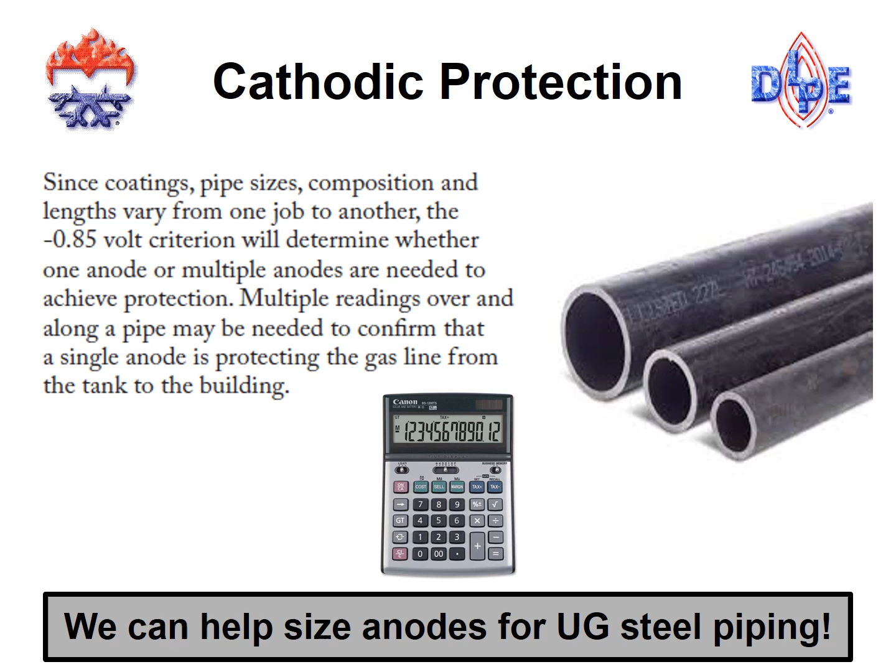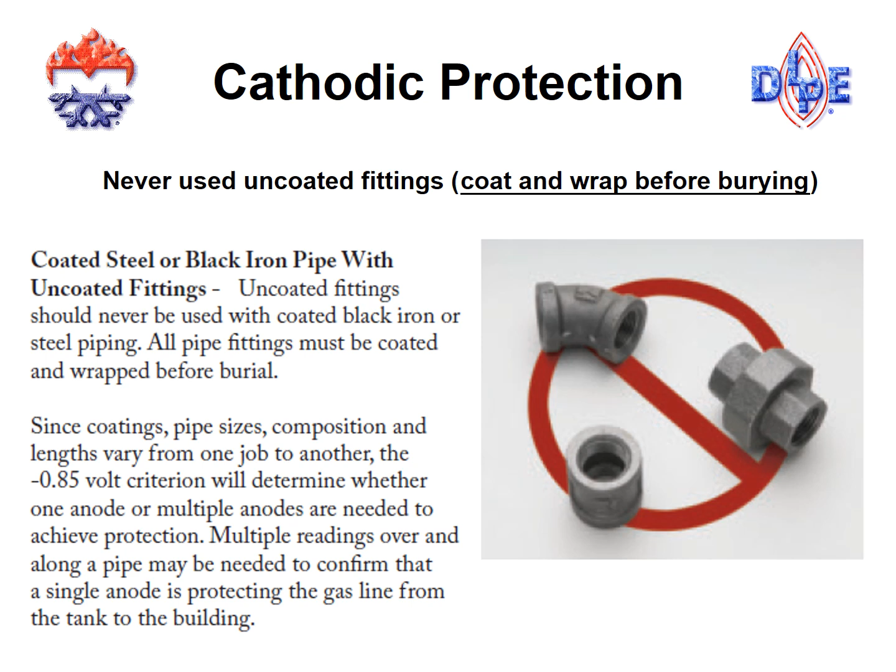And don't forget to wrap the steel fittings. Oftentimes these can be overlooked as part of the cathodic protection installation, but wrapping and protecting the steel fittings is just as important as wrapping and protecting the steel piping.

So far we've talked about the installation and connection of cathodic protection for underground storage tanks, and how to test to make sure that installation is still protecting the underground propane tank. NFPA 58 also spells out the testing parameters with regard to who does it and how often it's done.

Rather than read through the wording of the code, I've broken it down into a few simple steps. Testing, as per NFPA 58, is required upon installation, when the container is installed in the ground, unless weather conditions do not permit, in which case it must be done within 180 days of installation. After that initial test, it's required again within 12 to 18 months after the initial installation, to verify that the underground container continues to be protected. After 2 successful tests, it's allowed to be retested at an interval not to exceed 36 months thereafter.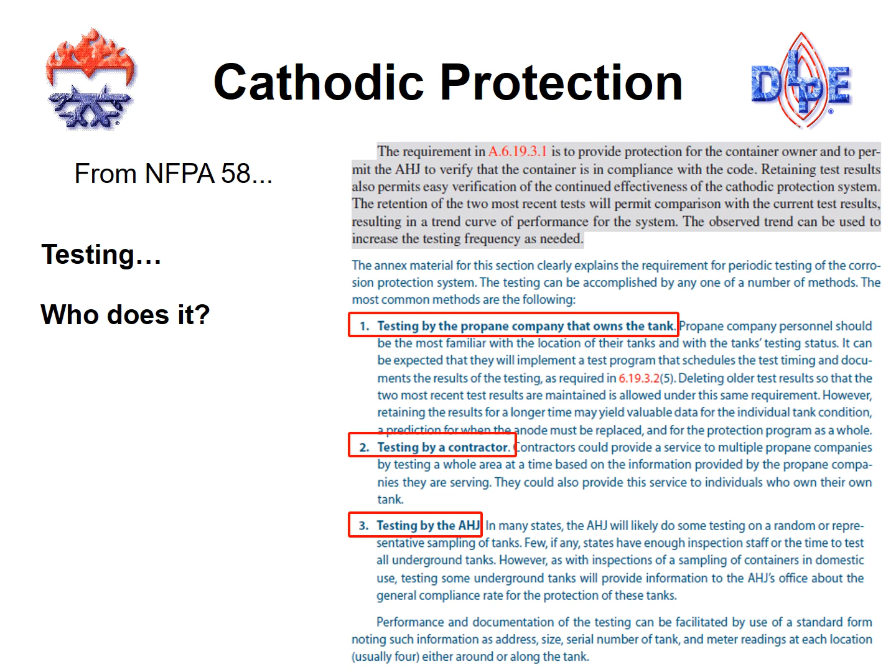So how does the code spell out who can do the testing? The testing can be done by the propane company who owns the tank, by a separate testing contractor, or by the authority having jurisdiction. My guess is that most all of these tests will be done by local propane companies. But again, the code spells out exactly who may be responsible for getting these test results.

Understand that NFPA 58 does not assign responsibility for testing or any other procedures. They say that basically any competent person can test the anode. We've spelled out who may test the anode, but part of the question also becomes, how does a delivery person know the tank that he or she is about to fill has been properly inspected, and if so, is it passing or failing?

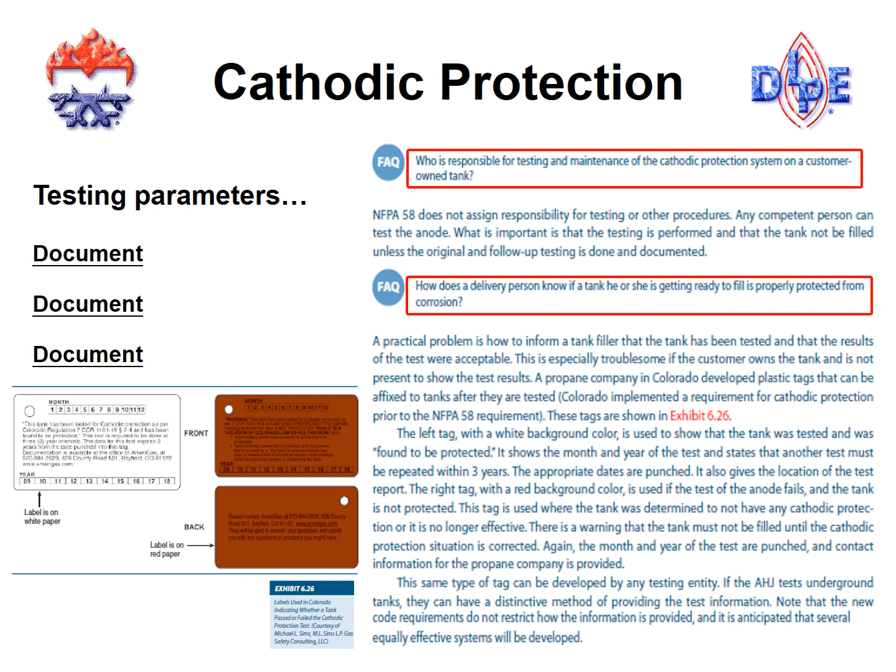One way to do this is with a tag being placed on the tank that was just inspected. Many organizations are using color-coded tags to communicate better with the drivers. For example, maybe a white tag would indicate that the underground tank has passed inspection. It would also include the date that the tank passed inspection so that the driver would automatically know that 36 months from that date, the tank was required to be tested again.

Maybe a failing container would have a color-coded tag similar to an orange, a yellow, or a red. A color-coded tag would indicate that the container failed and that the driver should not fill that until the cathodic protection has been repaired or replaced.

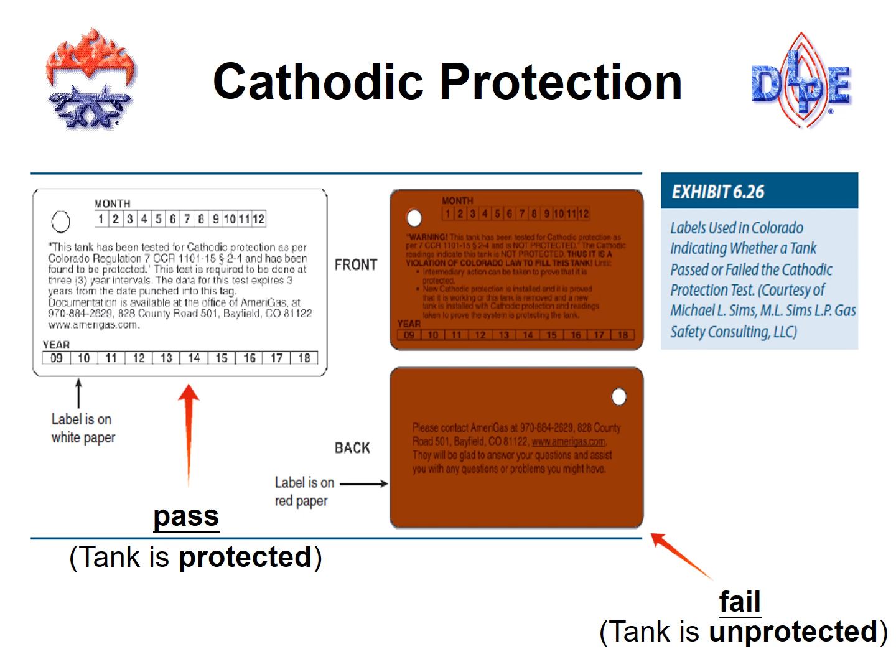I mentioned before that underground steel piping is required to not only be wrapped and protected, but also cathodically protected with anodes. This may be difficult because there are many different sizes of installations, whether it's pipe sizing, piping configurations, distance from container to the building or to whatever piece of equipment is utilizing the propane. There are calculators that we have for sizing the proper number of anodes for any underground steel piping application that may come up.

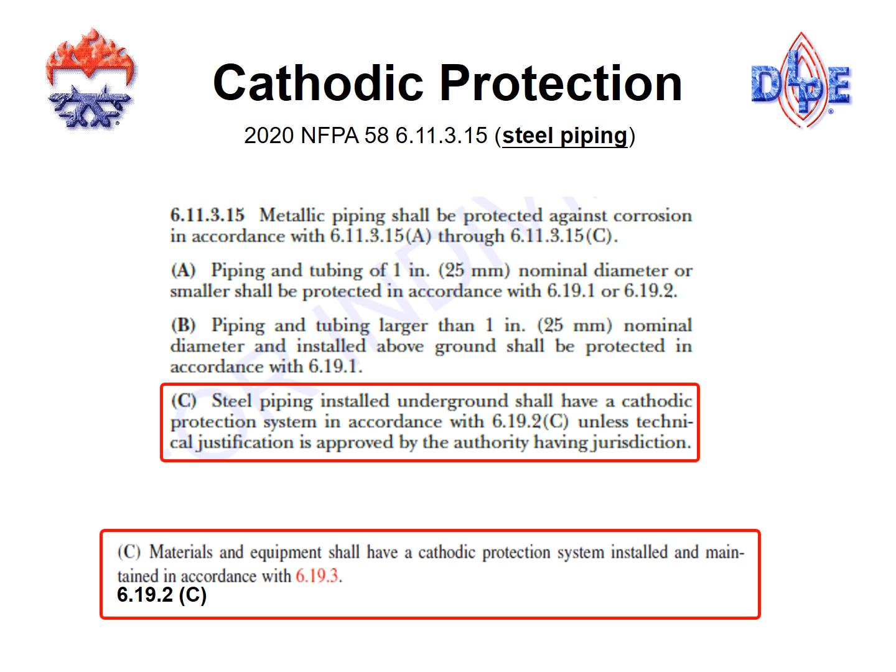One of the nice things about using the handbook is that it provides a better description of certain sections of the code to help explain why the codes are in place. It also goes on in certain areas to explain potential incidents that occurred in the past that have led up to why this code is now a requirement.

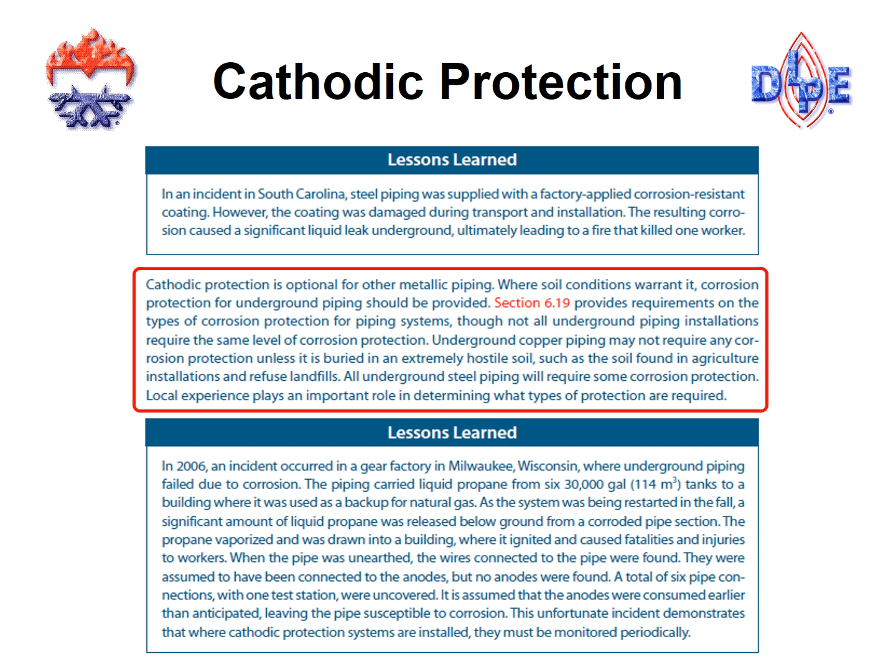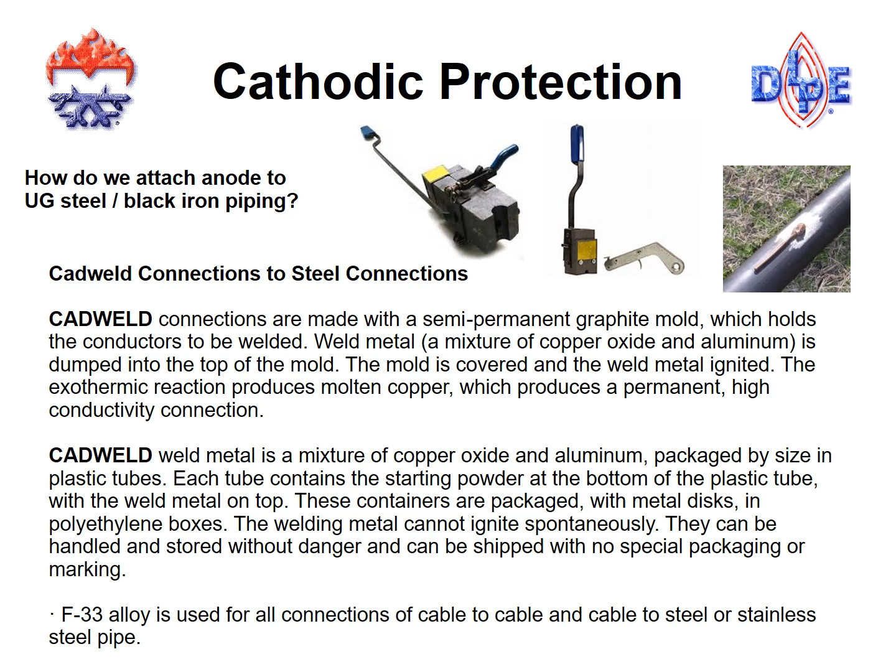If underground steel piping is part of the installation and therefore cathodic protection is required for that piping, one way to attach that anode bag to the underground steel piping is by Cadwelding it. Another means may be to use a clamp, an anode clamp. Sometimes a simple cable clamp can be used for underground piping retrofits or underground piping installations.

One example of an anode clamp which can be used on either underground steel piping installations or underground container installations, particularly where containers were not built with the threaded stud, which is in more modern tanks, welded to the side of the riser. Older tanks did not have that feature, and therefore to retrofit an older container with an anode bag, whether you're adding it for the first time or replacing it, 10LP1391 is specifically designed for that purpose.

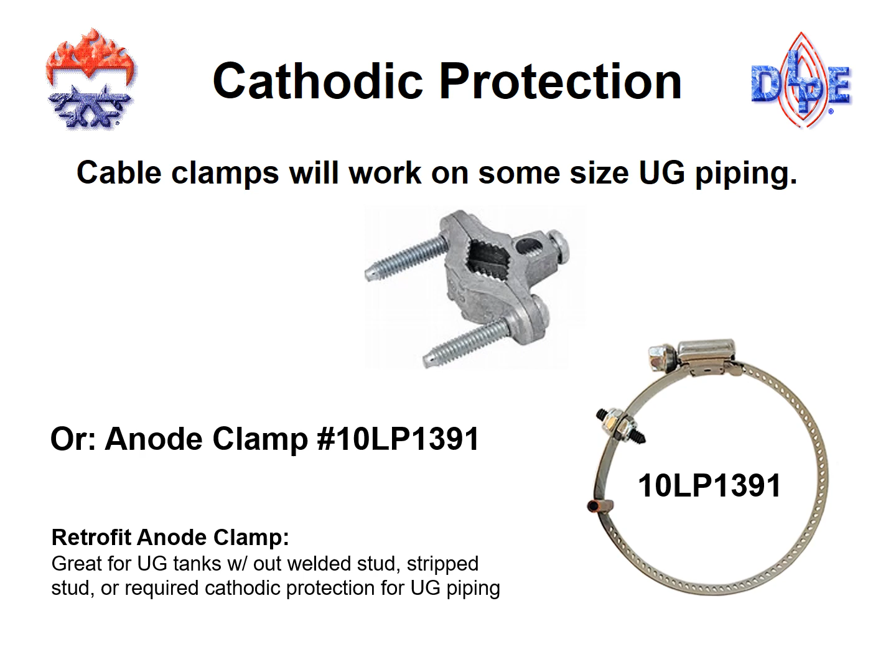We also have a complete anode test kit. This is a kit which comes in a very sturdy plastic case. It includes the copper sulfate half cell, the copper sulfate crystals, a digital multimeter, 2 extended leads, a laminated instruction sheet, and also a documentation pad for each test that's done. The catalog number for this complete kit is 10LP5791, and my suggestion is to have at least one of these kits in the company.

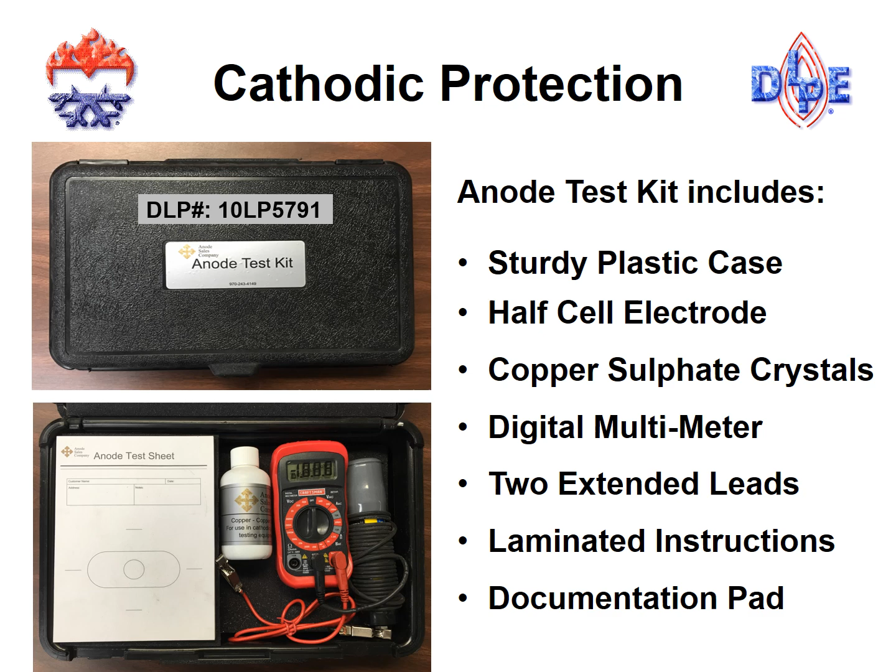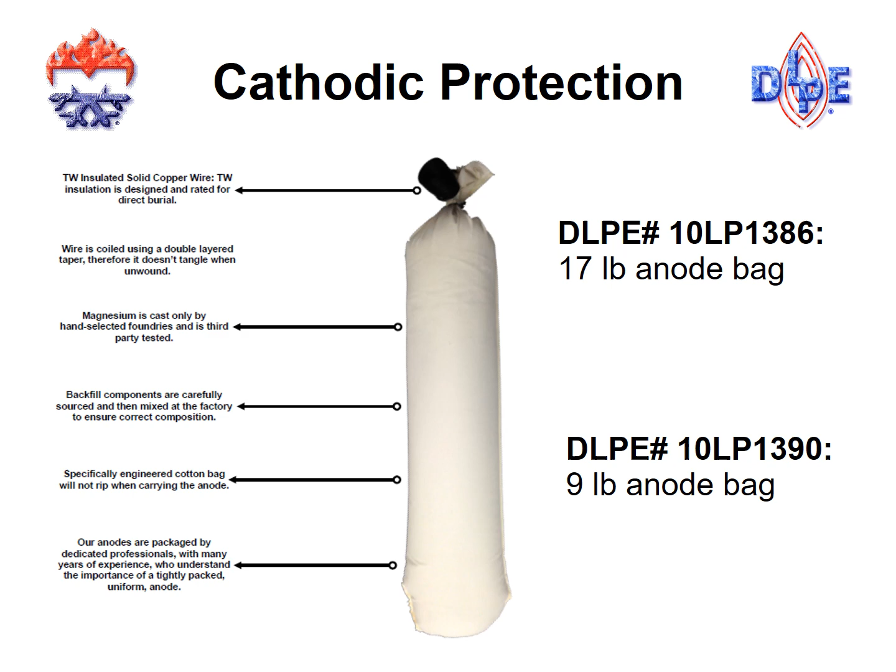For more information on cathodic protection, go to propane.com and check out the Cathodic Protection Training Guide downloadable PDF.

To finish up this presentation on cathodic protection, we have some Q&A. First question, the most commonly used anodes are made of what? The answer is magnesium. True or false, after placing in the ground, anodes should be kept dry? The answer is false.

Question 3. How many sides of a tank must be tested? The answer is all 4 sides. True or false? Anodes must be tested only once after installation. The answer is false.

Last question. What is considered the first line of defense against corrosion? Tank coating.